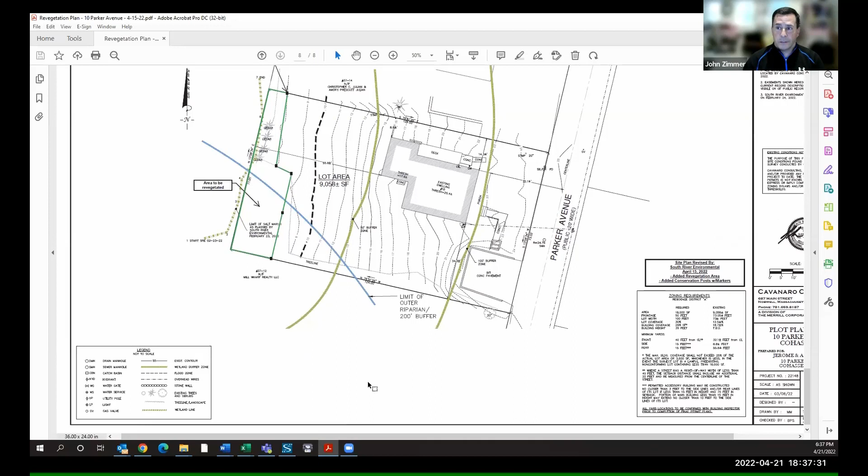Tell me, John, there's a lot of what I would call incursion, and I believe that's the 50-foot buffer line, the first green swath coming down. Yeah, right here it is, yes. To the left of that, all right. Is that currently lawn now? Yes, the majority of it is. You can see, if I zoom in a little bit, there's an existing tree line that they had shot. So that's the limit of basically the, quote unquote, natural vegetation. And then the rest of it's lawn basically down to it.

Tell me, will you be revegetating a portion of it with grass seed, or what will you be doing there, John? No, it's everything that's within this green box. The only seed that will be put down is a New England wildlife and conservation mix. Okay. So it's all native, wildlife friendly type species. So it's not lawn grass at all. Okay, that's good. And how is the ground prepared before you put that down, John? They'll typically just rake it out in the areas that it needs to. They don't do significant soil amendments. I don't think you'd need that out there to get the seed mix to grow.

And last hearing, we had seen that there were some stumps that were down in that area. Do you have those located on here? I do not know. So my question would be, do we have them on any plan? I'm just wondering what the relationship of those to the revegetated area is. I don't believe that those ones were survey located. There's a couple up by the house that are the more important ones that they'd like to remove. I don't want to speak for the Whitneys, but if they could leave the stumps in place that are in the revegetation area, then that would be preferable. Or maybe grind them to ground level, versus having to pull the whole thing out.

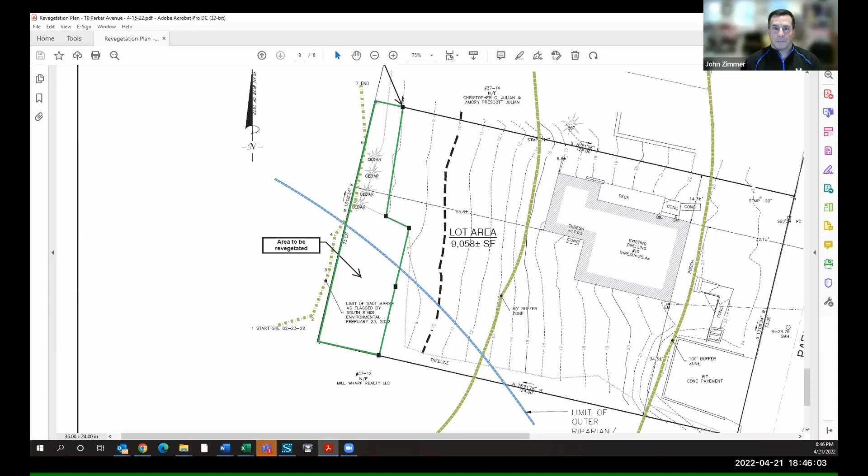Our next hearing this evening is at 92A Beach Street, and I need to read into the record the public notice. In accordance with Massachusetts General Laws, Chapter 131, Section 40, the Cohasset Wetland Bylaw, and the Cohasset Stormwater Bylaw, the Cohasset Conservation Commission will hold a public hearing on Thursday, April 21st, 2022, at 6:30 p.m. via remote participation on a Zoom platform from applicant Robert Bailey. This is for a request for determination of applicability 22-09 to remove 4 trees from a property at 92A Beach Street.

Bob Bailey was unable to make it tonight, but he said that his arborist, Andrew Spalt, would be able to call in. I don't see him in the audience, but there is a phone call-in listener. So I'm not sure if that's them, but if they can raise their hand, we can promote you. Sorry, I just raised my hand. Yeah, it's okay. I could see if they call in later. I don't know. I don't see him in the audience.

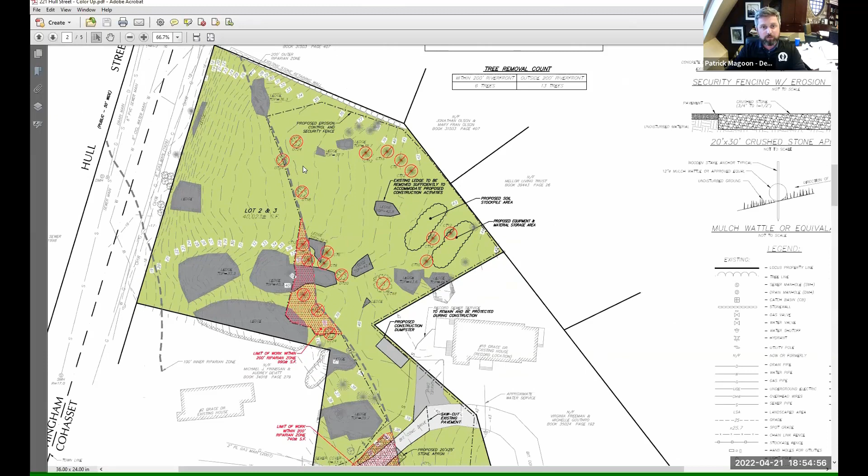As noted, I've got a tree removal count on this sheet within the 200-foot riverfront area of 6 trees. And those would be these, 1, 2, 3, 4, 5 right there, and this guy kind of on the edge over here, which on the landscaping sheet or the layout sheet, we've shown some proposed mitigation to offset what we're proposing to cut.

And here's the layout sheet, proposed landscaping at a 2-to-1 replacement, 6 trees removed. We're proposing 12 plantings along this driveway and walkway within the riverfront area to mitigate that. You'll see the proposed building here. It's approximately 3,425 square feet at this time. We don't have an architect at this moment, so that's not finalized. We will need to have one aboard to get a final number on that.

What we're looking to do is kind of lock down more of a limit of work moving forward, as we're still working with the building department in regards to that and our building footprint. And that won't really be finalized until we have an architect. So what we're looking for is to lock down a limit of work, and if that footprint changes once we get an architect, we'd obviously come back and amend that, but I'll work within that limit of work that had been approved.

But one thing you will see is access to the site is coming off of Grace Drive. And we did that for two reasons. One, obviously you can see the slope adjacent to Hull Street is pretty steep. The only real access you could do is coming in from this corner right here, maybe wrapping around, which would take some significant grading. It'd be a lot harder in multiple aspects. So we're proposing to come off of Grace Drive, easier grading, a little flatter, easier to work with.

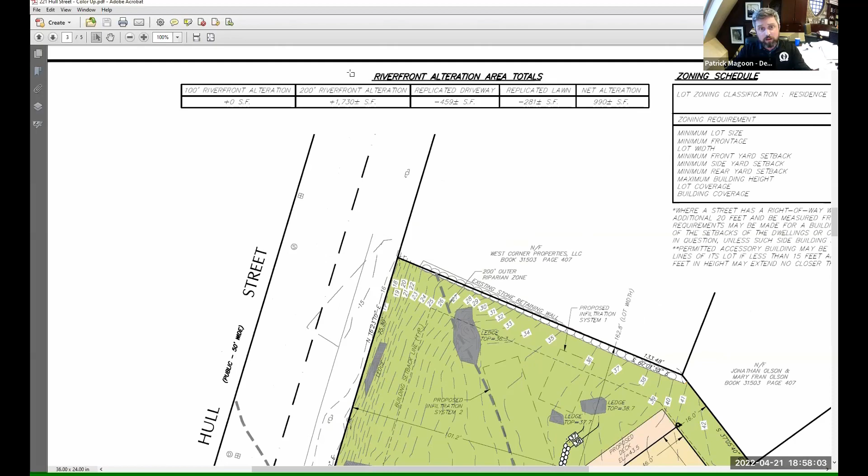So our total alteration area is 1,730 square feet. However, we have replicated the driveway area down here. That's approximately 459 square feet, as well as replicating some existing lawn, which is 281 square feet, bringing us down to 990 square feet, for which we filed a variance form that we submitted with the packages that we sent. So we hope that, getting below that 1,000 maximum alteration by the town standards, the wetland bylaw, section 40, I believe, replicating some of that area will help get this through.

So this is also a grading sheet. We had some accompanying grading. This is the high point of the driveway. So this water will shed this way and also this way to a catch basin over here. But largely the grading and drainage patterns on site are relatively the same. This area of the site is still sloping that way, water's still shedding that way, and the portion of the site over here is still shedding that way. We haven't really changed the drainage patterns much at all. Just tweaked it a little bit for whoever's living there to have a better experience.

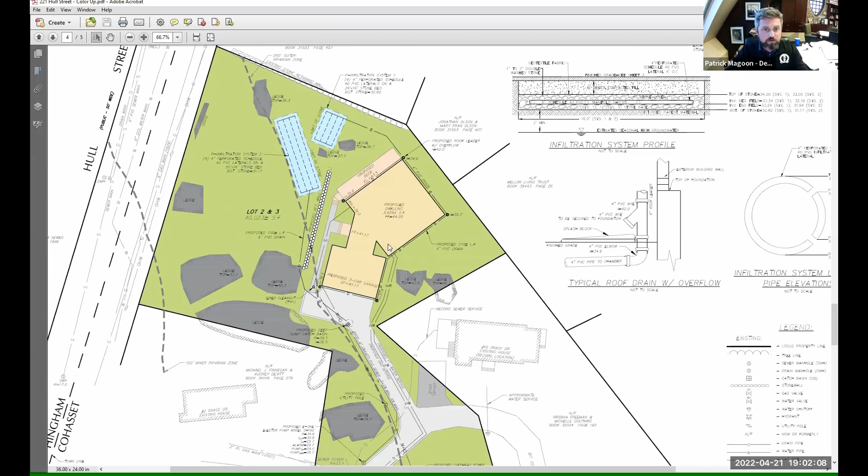But yes, why don't we go to that then before we go on? So this is just our utility. This doesn't show the grading, just to better show the utilities going on the site. So to get into drainage specifically, we have two systems. They're both perforated 4-inch PVC pipe with surrounding stone. I have details of the exact dimensions of each one on that same sheet.

System one is strictly for the roof runoff. So that captures all the flow from this 3,425 square foot building, and that gets directed down to system one, which is infiltrating, but due to, as I mentioned before, the low infiltration rate, a lot of it isn't infiltrating. We've done it to the greatest extent possible, but given the soil conditions, there's only so much that can be done. But we have reduced or matched peak rates of flow.

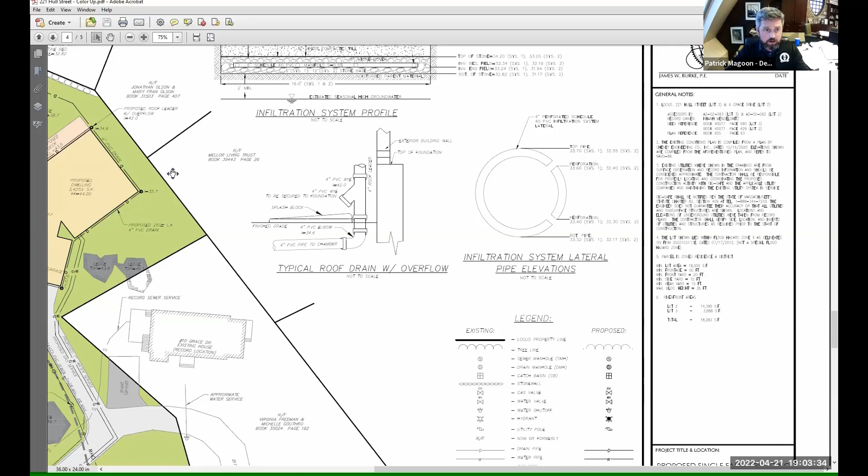Overflow control is provided by a roof leader here with an overflow outlet at 42. So during events where this backs up, it'll overflow out. It actually has a detail like this, and that will overflow down and then flow down to Hull Street.

Infiltration system 2 will capture, actually, if I go back to the grading sheet to show you better, this high point right here, the driveway is kind of the dividing line of the watershed. So it'll capture flows of the driveway coming this way, the whole driveway area, and a good portion of this backyard, which is sloped to eventually get to that catch basin. And that catch basin is directed to system 2. It functions the same way as system 1; when it backs up, it'll similarly flow down Hull Street.

So just while you're on that, it looks like the existing grades now have pretty much everything running right to left on the sheet, right? Correct. You're adding a swale or whatever you want to call it in the driveway, so the first or maybe the middle third of the driveway is going to be going left to right now. Am I reading that right? So you can see my mouse, right? Between the 40 and 39, yeah. Between this 40 and this 39? Yep. So everything on this side is gonna flow this way.

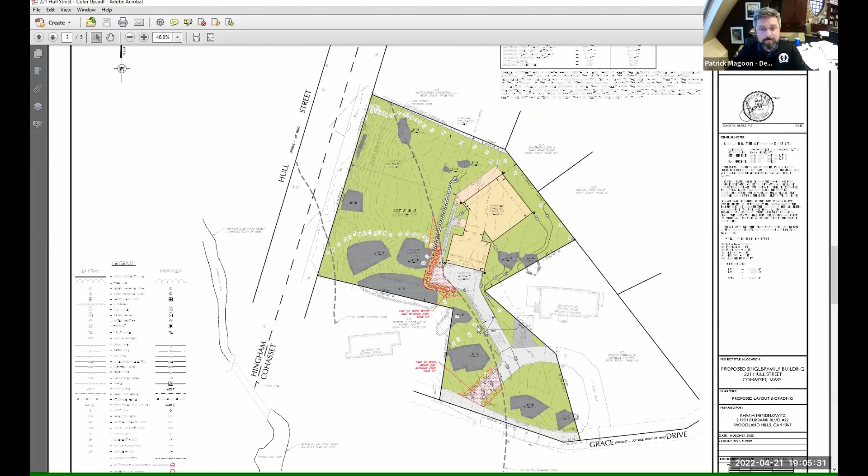But if I go back to the existing, it's flowing this way already. There's kind of a dividing line right here. So in our HydroCAD calcs, we've shown that peak rate of runoff has decreased going this way, as well as going to Hull Street. But you are understanding that correctly, if that answers your question. Back to the utility sheet.

In addition to the drainage, all services will be coming off of Grace Drive, pretty much within the driveway envelope to minimize disturbance area. We have a 1-inch type K water on the far right side of this driveway. Proposed gas service in here, that'll be per the utility's purview, how they deem best to do that. We have a sewer service, which keeps that 10-foot separation. The minimum is right here, 10 feet from sewer to the water.

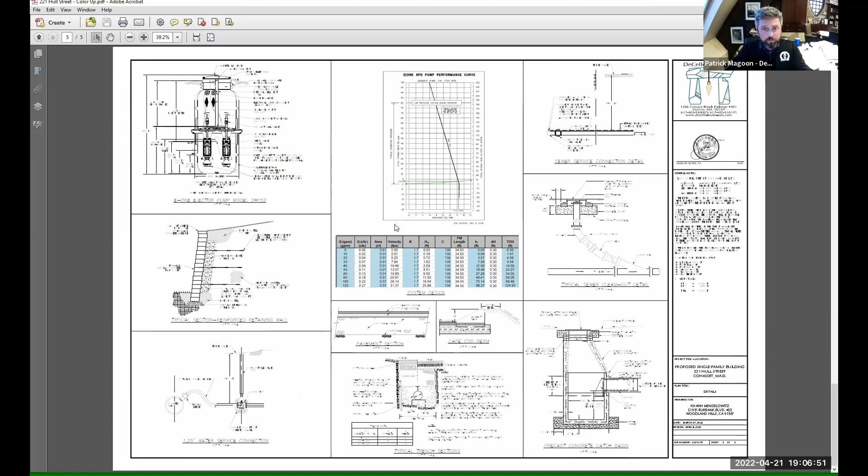So the sewer comes out by gravity down here to this E/One pump, and that E/One pump connects into this force main over here. And the proposed electric and communication services are proposed to come off of Grace Drive via this utility pole, with a proposed utility pole about midway, out of the riverfront area, and then tying into the building where it's best fit. And this is just our general detail sheet. That's really all I had for you guys. I'll be happy to answer any questions from the commission or the public.

Can you go back to the grading plan and zoom into the house and parking court maybe? Yep. Like maybe here. That's fine. So the existing grade is between 42 and 30 something for the home. Do you know how much fill's going to be brought into this site? I don't have it for the whole site at this time. For the riverfront area, it's approximately 1,300 cubic feet. Okay.

And have you done any test pits out here, or you're just basing it off of the soil classification? No, we have not at this time. Yeah, strictly off the soil SCS. Okay. We typically like you to do a test pit just so that you actually know what kind of perc you're going to get. I mean, obviously you're counting on not a very good perc, but it could be even worse. So okay, it's noted. Important to us. Yep.

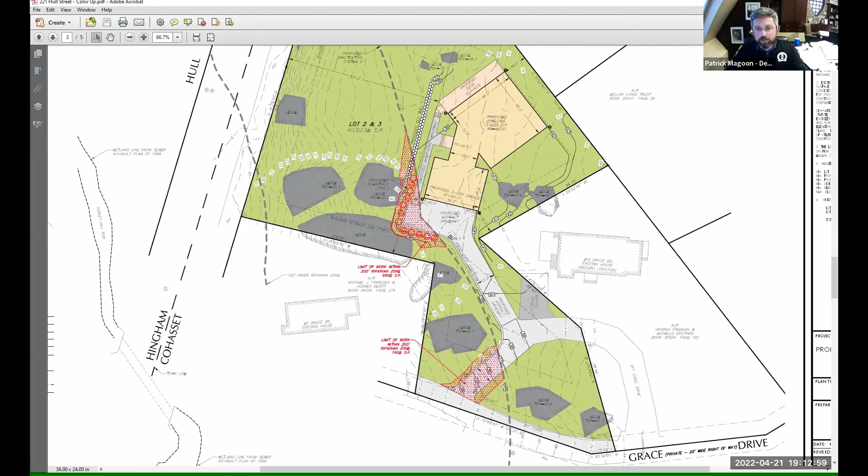How far are you from the riverfront there? 200 feet or so? I'm sorry, I missed that last part. Yeah, so this dashed line right here is the 200 foot across the site. And you'll see this is the 100 foot that barely crosses the site over there, which we're not proposing to touch at all.

Patrick, I see a lot of green on the site. Yes. That tells me you've got lawn there or something. How deep is the soil there until you run into granite? I presume, since we have the granite outcroppings, where we don't see the outcropping there still is granite, just not on the surface. Yeah, so it's not really known until you start digging. I just did that more for presentation purposes to make the ledge stand out.

But yeah, given the amount that's above grade or at grade, you could assume there's quite a bit right beneath the surface in those green areas. Yeah, I mean, I see the green, and I think that you're telling me, Eric, don't worry, this area is going to percolate a lot because we don't see any ledge there. But suppose the ledge is 6 inches below surface, you're not going to percolate at all. It's all going to go rushing down onto Hull Street.

I understand. It wasn't my intent to throw you off with the perc rate. It was more from a presentation standpoint to bring out the impervious areas, that being the pavement and the ledge, and showing that the other stuff is either vegetated of some sort, at grade, knowing that right below grade there could be, most likely would be, ledge.

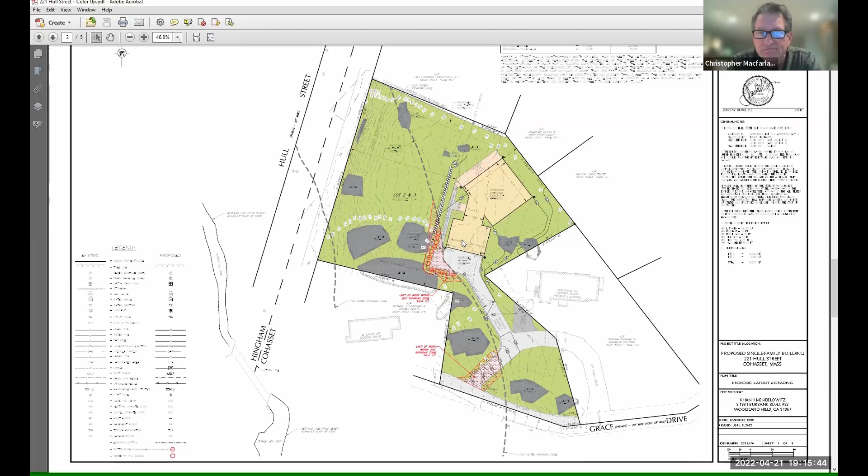In the meantime, I can pull up photos. Do you guys want me to pull up any photos from the site? Yes, please. Is it okay if you stop sharing, Pat, so I can pull up my screen? Yep, no problem. Thank you. I took a lot, so please bear with me. I'll go through these quickly.

So this is looking at the site from the bottom level on Hull Street. This is walking around Hull Street, the existing conditions. Sorry, my computer's going a little slow. So you're standing in the restaurant parking lot looking up at this site? Yeah, this is walking along Hull Street so you can see the existing conditions. No work is being proposed in this area, but I wanted to give you the full perspective. Sorry, my system is going pretty slowly.

Charlotte, the proposed work is what distance above what we're looking at there? So the proposed work is outside of the 100-foot riverfront area, and then a portion of it is crossing into the 200. So this is just the view from Hull Street. And then this is going upward into the property where you can see all the existing ledge. And this is the site as it is right now.

As you can see, it was previously disturbed. There are some dirt stockpiles, and it looks like they may have tried to survey for the foundation; they tried to dig a trench to maybe look at drainage. And these are some of the existing trees that are marked to be removed. This is walking around the site. These are the trees proposed to be removed in the 200-foot riverfront.

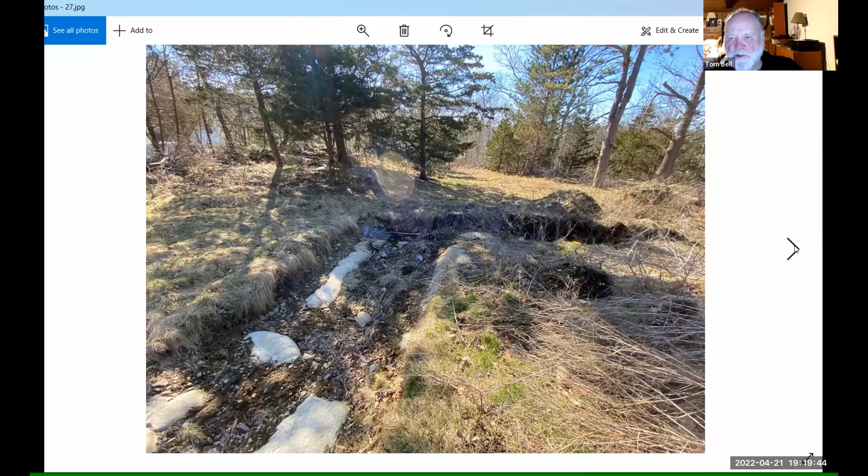the applicant has failed to note that they're within 500 feet of an area of critical environmental concern. In fact, they checked the box that said there was no area of critical environmental concern, but they're only 500 feet away from one. So that's something we need to keep in mind. And in fact, Turkey Hill Run drains into that. So any water that ends up on Hull Street or Grace Drive is going to end up in Turkey Hill Run and immediately into the ACEC.

So we need to really be cautious about the stormwater conditions here, how they're treated, so that we don't get sediment going into Turkey Hill Run, which then goes into the ACEC. That's not a good thing. The other one, I believe both Eric and Chris pointed out, was there isn't much soil here, and there really isn't. All this outcrop is speaking to how thin some of the soil is, and what soil there is is probably till. And it's obviously pretty compacted because it's not draining. So that's an issue as well.

One of the things that would concern me if I was an abutter here, particularly if I owned that parking lot, is there's going to be 2 large infiltration chambers that are going to drain right into this granite in a much smaller area than is happening naturally. So it's going to focus all that runoff in two areas, and water is going to find fractures in that granite, and a lot of it's going to end up in the parking lot.

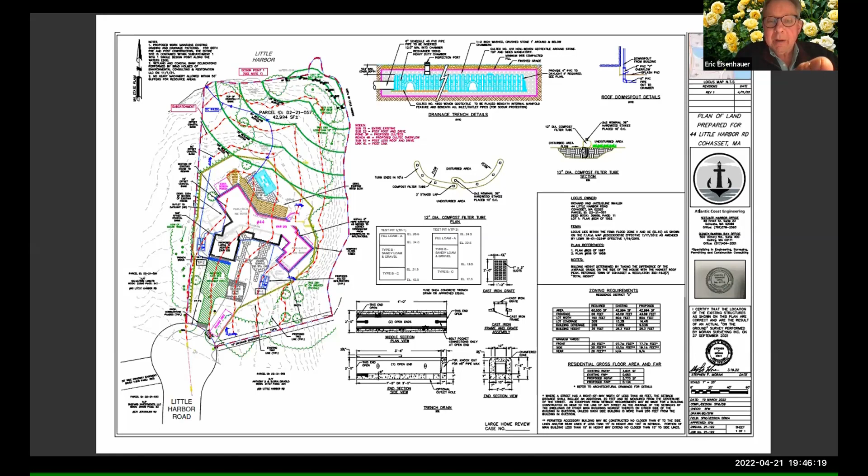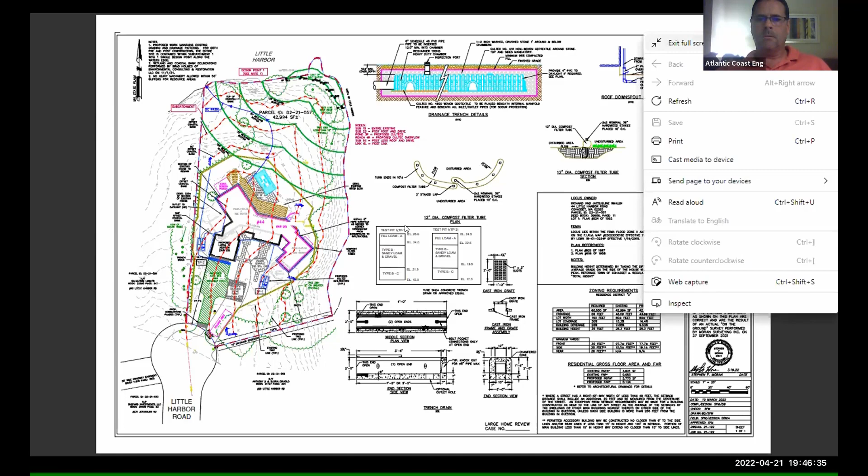Excuse me, could you expand the diagram so that the drawing itself and not all the footnotes fill the screen? Because as it is right now, I can't read anything. What we want to see is the drawing on the left. Yeah, just the plan for now, and move the other stuff off. He's working on it, just bear with me. How is that? Is that better? Getting better, yeah. I guess we'll have to move it, otherwise we're excluding part of the plan itself. Okay, that's good. Thank you.

Okay, so the first item we addressed, which you folks had a concern about, was the location of the Cultec on the right-hand side. We previously had it over on the right-hand side of the existing house. It's probably too close to the top of the coastal bank, so we moved it more towards the front right of the house, well set back from the top of the coastal bank. As you can see here where my cursor is, between the proposed paver terrace and the front right of the house. Can everybody see that? Yep. Okay.

And then the other Cultec more or less remained in the same place. You also wanted us to provide the test pit information and location, so that's been added to the plan, and you can see over here on the right the test pit information along with the soil types and the elevations associated with the locations of the test pits.

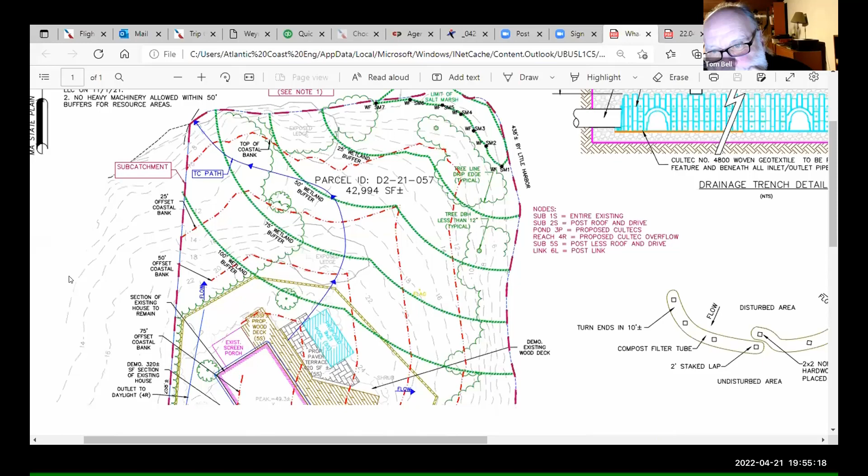I think what Tom is getting at is that the Cultec system collects water from a particular area of the site. Sure. Right. The Cultec chamber is your design point, is that correct? I'm sorry, I can't hear anything right now. The Cultec chamber is your design point. Is that correct? Yes. And so it's drawing water from some place, which is the subcatchment itself, right? Yes, from the roof, in this case on the left-hand side. You have a subcatchment, a route, and a design point where you do something with the water.

Okay. So that's sort of what we're looking for. Where is the water coming from? Where is it going? How's it going to get there? Right, and it's coming from, in this case, the roof. We can show you on the architectural drawings, at each corner of the roof, there's downspouts that will come down. You can see one in the back left here. And again, I apologize for these yellow labels. I don't know why those keep popping up.

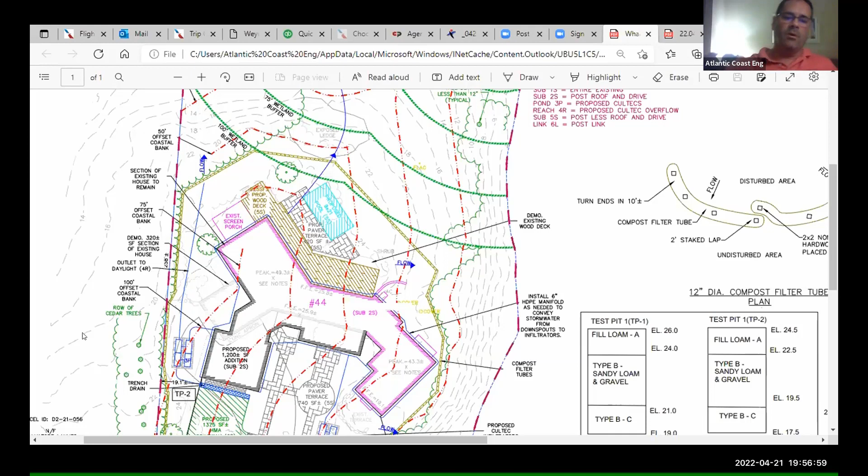But my point is, at each corner of the house, there's a gutter tray and a downspout that comes down into the Cultec. You can see the blue line there. So that's the flow. Goes from there to the Cultec, and then relative to this property line, it generally goes down perpendicular to the contour lines in the rear of the property. Okay. But it's also collecting water from the trench drain next to the driveway, correct? Correct, 100% correct. And so what is the limit of water going into that trench drain? The limit of water for that is essentially the area around the driveway.

Well, that's the point, is what's essential and what's actual. You can see the area shown in the stormwater report. No, we can't see it, because you don't know where the ridge is. There's a ridge that divides the property into zones, and each zone flows to a certain catchment. That's the whole idea here. Yes, I'm well aware of that. This drawing should have been done with just the subcatchments on it and the building footprint, so that we can clearly see what's happening here. This is a very busy drawing.

Right, understood. But we also need to show what's proposed on the site plan, right? That's what's required. And so there's driveway changes. What's required is that we be able to understand what you're talking about. And anything you can do to make our job easier makes your job easier. When you load your drawings up with all this stuff, and then we try to talk about one element after another on the same plan, it's very hard to follow. Sometimes when you make a drawing, you think it's obvious, but that's because you're making it. You need to look at it from the user's point of view. And this is a busy drawing.

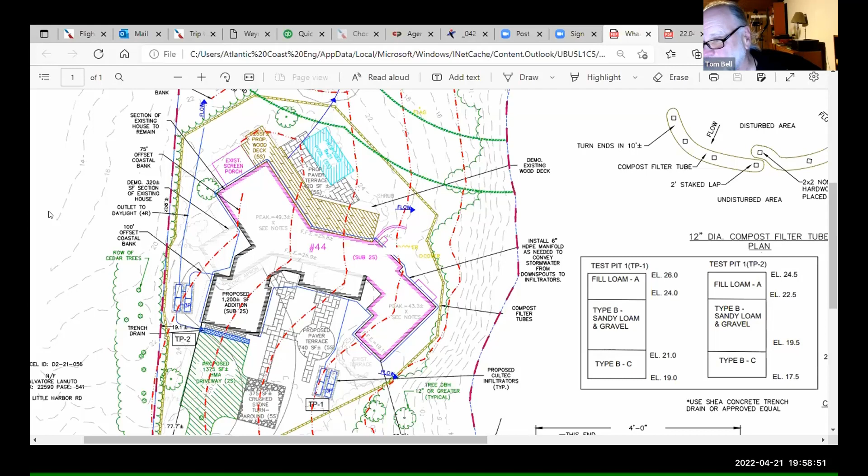I agree 100%. It's a busy site. There's a lot here, both existing and proposed. I tried to best capture that. I would think that you would have a drawing for each one of the elements that we're going to talk about. I'm sorry, can you say that again? I would hope that you would have a simple drawing for each one of the design elements we're talking about, whether they be the structures you're going to be putting in, or the drainage, or whatever it is. Why do we have plants shown on this? We're talking about your stormwater management plan, but here we're looking at trees here and there.

Yeah, some of the trees are shown. Commissioner Bell, this is Sean Papich. Those are the existing vegetation. That is part of the existing conditions piece that Atlantic Coast had left on the plan, which I think makes sense. To your point, it seems the drainage and the subcatchments maybe on their own plan is easier to read, but most of the other hardscape elements, in my opinion, need to be shown on here so you understand what we're proposing.

But I think you're right, the drainage aspect of it is probably challenging to pick up, especially the description of the subcatchment areas. I can see that from this. Sean, we have a great deal of concern on all these projects about new work that's going to take place within the 50-foot buffer zone. Correct. I'm trying to figure out, looking at this, what's going on, and I can't. I would like to see a chart with the build and the buffer zones, and only that. This is a very complicated buffer zone situation naturally, and I don't think I can do that here.

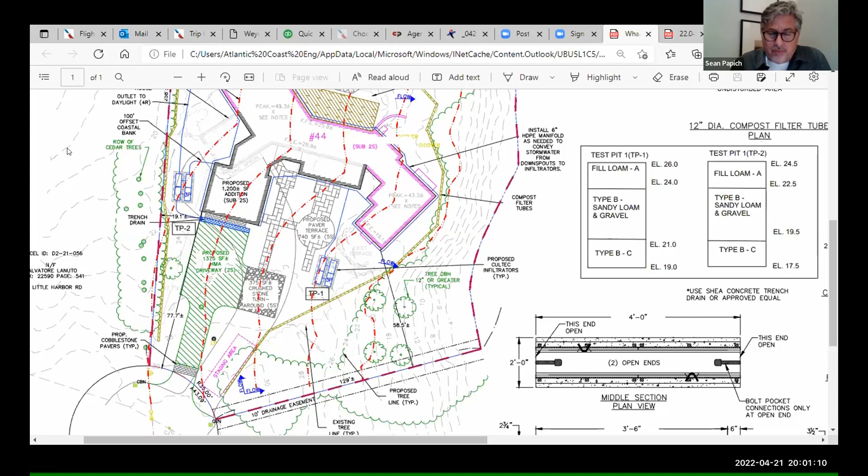We looked at it last time during the first hearing. There was discussion of that when we pulled up the site plan and description of existing conditions versus proposed. On the first hearing, that was a major part of the discussion. That was the presentation of the plan. I'm sorry for cutting you off, Tom. Oh, it's okay. I'm just looking at this thing and trying to make sense of it.

I do understand Tom's point, and it's not easy. I do understand your point about the drainage piece and the subcatchments. Generally, we're used to seeing a set of civil drawings that goes material plan, layout plan, drainage plan, utility plan, you know what I mean? Where you can pick out specific plans, 4 or 5 sheets that are the same layout but show different elements of what's going on the site, instead of all in one.

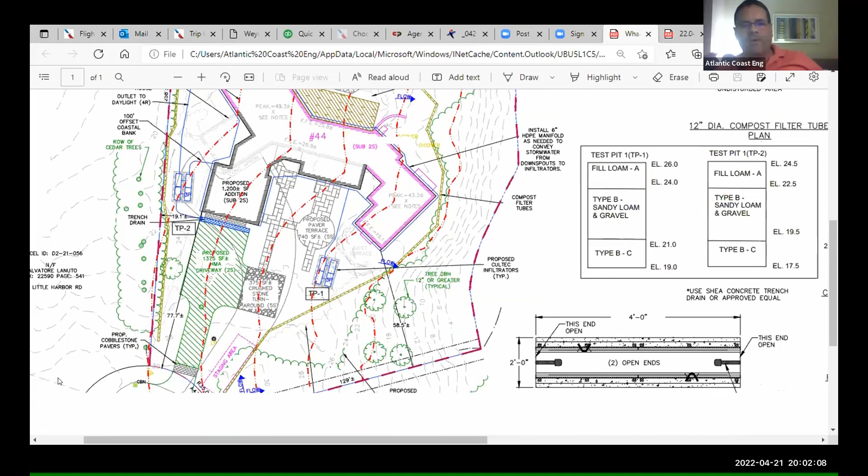Okay, so if I could just talk about that briefly. There are no plan changes in terms of utilities. It's a pre-existing house. There's a renovation on the inside of the house, walls in. There's no planned utility changes on the exterior. There's obviously site civil work for the Cultecs planned, and the associated addition with the garage, as well as the landscape architectural work. This is a Cat 1 stormwater submittal, given that it's an existing house with a proposed addition.

We did our best to depict the proposed layout with the Cultec systems, and I feel as though we addressed all your questions and concerns that you had last time. If you need some other edits done, we'd be happy to try to do that. But this is what the proposed site plan looks like. I'd be happy to pull up the existing conditions plan if you want to see that.

No, it sounds to me, which we can't tell from this plan, like you haven't defined the subcatchments correctly. If the driveway and the roof go into the same Cultec, they should be in the same subcatchment, and it's not shown that way on this plan. Well, it is shown on the plan, right? I don't see a line that says that 2S continues into the driveway. So the driveway pitches towards the trench drain, and you can see on the left side of the trench drain there's a pipe that goes from the trench drain to the Cultec.

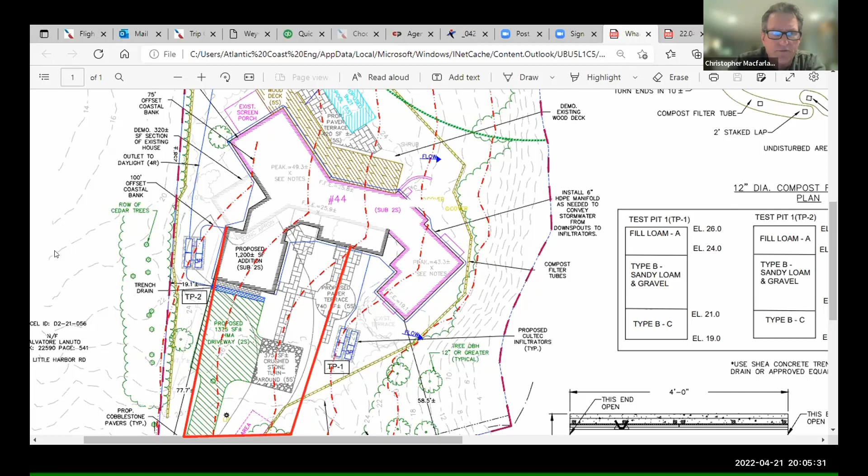But is it just a pipe right off? Is it like a standpipe on top of the Cultec, or is there an outlet somewhere? I can show you in the detail. There's an outlet. Let me zoom in on it. There's a 6-inch Schedule 40 PVC outlet. And what's the elevation of that? Does it have it there?

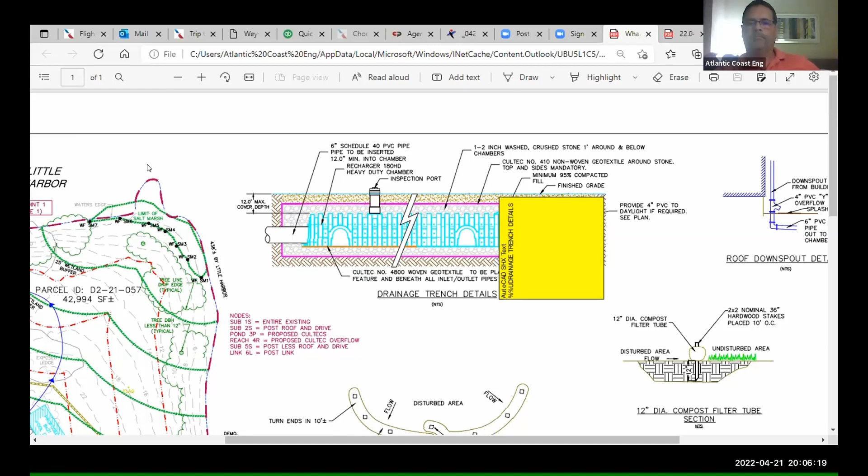The elevation is 5 feet below existing grade. 5 feet below existing grade. Yes, to get below the frost level. So you're gonna have a trench basically heading towards the bank, right? And daylighting somewhere down there. So it'll exit the Cultec, and then some of it will percolate into the existing soils, and then the overflow will head towards the top of the coastal bank. Yes.

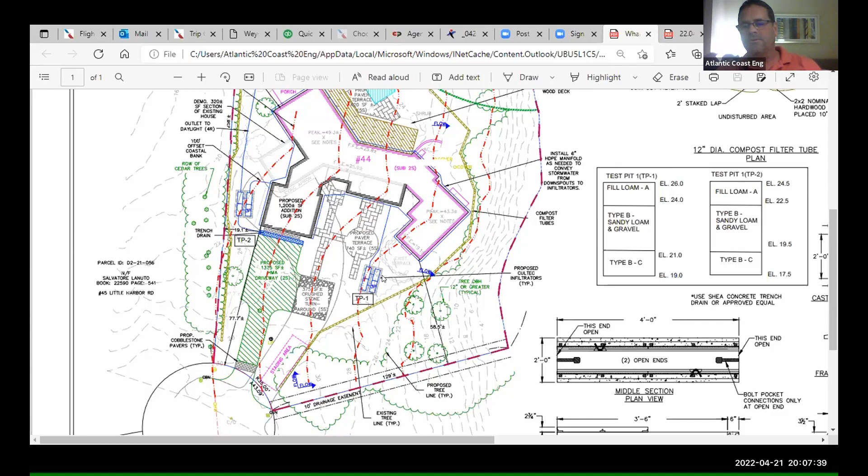But if it's 5 feet down, it's got to daylight like out here somewhere. Yes, that's correct. And kind of the same question for the other one as well: is the blue line an underground pipe, or is that just where the water is flowing? Where does the actual overflow pipe come out for both of those? I mean, everything's perking into the soils. We didn't design the pipe to go all the way over to the coastal bank. I think that would create unnecessary erosion along the coastal bank. So we have it just coming out of the side of the Cultec, and then in theory it percolates from there.

Oh, I see. Outlet to daylight is not necessarily an overflow if it's filled up. That just means that's what's perking through the soil. Exactly. When you say outlet to daylight on the left. But these systems do have an overflow, right? I would think, yeah. Otherwise, everything would overflow back at your gutters. Right. But it wouldn't be at the bottom.

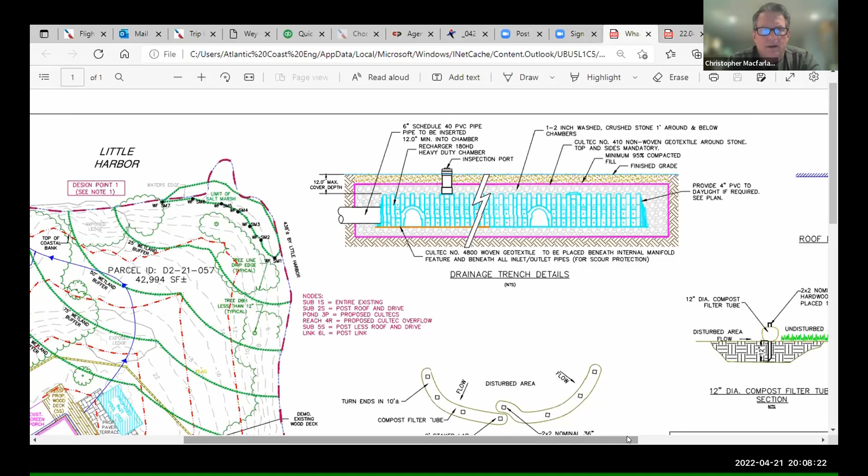So how much clearance do you have from the bottom of the Cultec to, first of all, bedrock? And if you don't know that, then to the water table. So our test pits, one of them was 7 feet and the other was about 7.5 feet. We encountered groundwater right at the bottom, approximately 7.5 feet.

Normally, people that come before us would describe the soil and estimate where the seasonal average water table was based on modeling. Not the best measure, but that's normally what we see. There could also be references to any weeping in the sides of the pits, not just standing water, but weeping, stuff like that. Would it be helpful to share the photos of the test pits? I'm happy to share my screen. Yeah, let's take a look at them.

Okay. Sorry, Jed, can you stop sharing for 1 second? Sure. Thank you. Sorry, lots of things open. Give me 1 second. There we go.

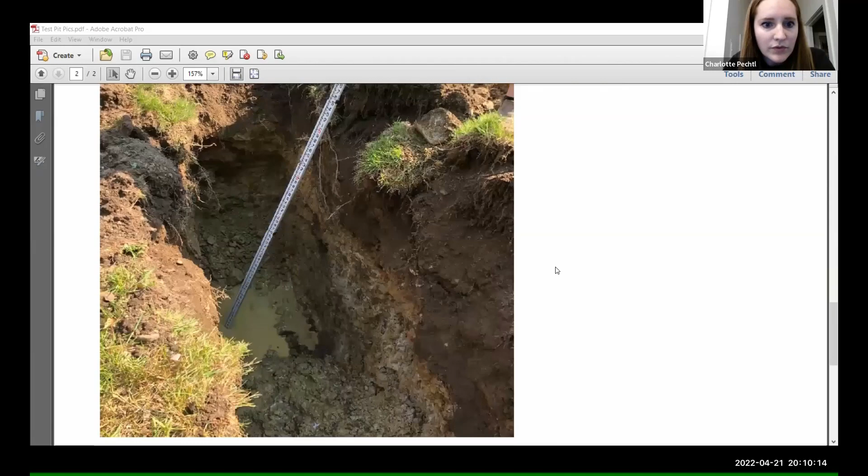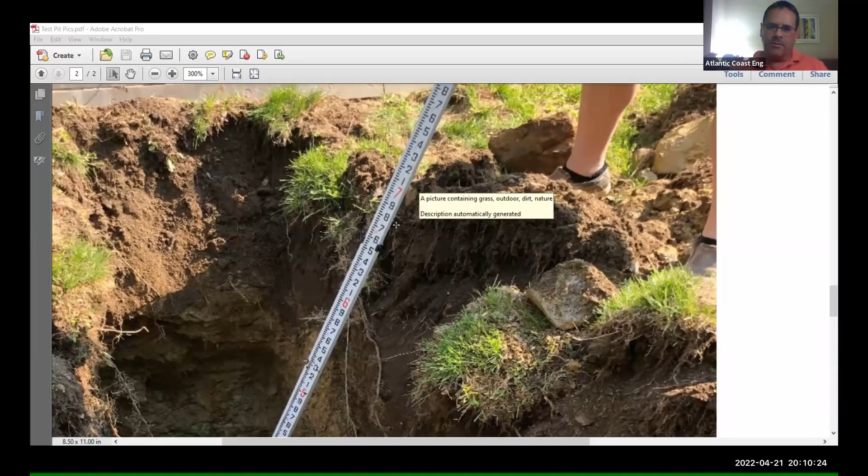So these are the test pit photos that were taken from the rear right side of the house. I'll stay on this one for a bit, but there's more. Front right side. And then this is the front left. And if you zoom in on the rod, that was a survey rod. It's approximately 7.5 feet. There's a pretty healthy layer of loam there. I stand corrected, it's approximately 7 feet. Sorry about that. About 5.5 to 6 feet maybe, standing up. Yeah, it's at an angle, so it's not 7 feet. And it's in the water, yeah.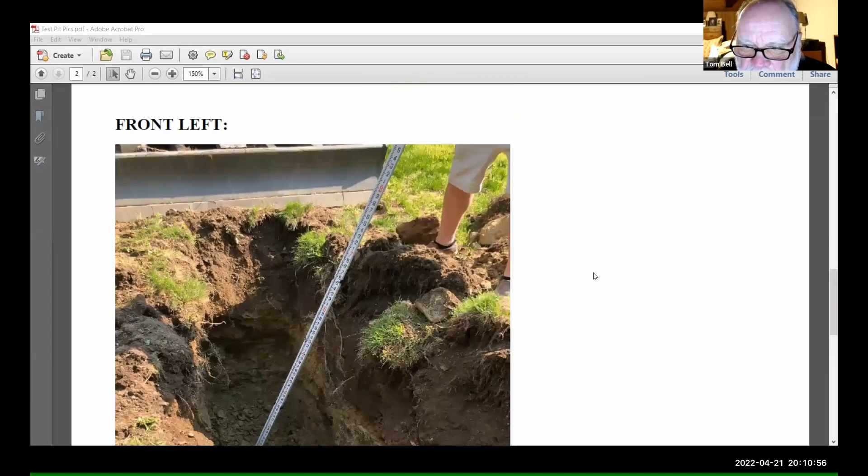So it looks like you have a zone of iron hydroxide right at the base of the loam, which is probably marking your seasonal high water table. And that looks like it might only be 2 or 3 feet down. Ordinarily, that would be in the soil description. Do you have the soil description you can show us? That's a pretty obvious feature. A lot of soil profiles have a really hard time seeing these various zones, but this one is clear as day. You've got bleaching, you've got iron oxides along the top surface of it, where iron minerals are being oxidized. Clearly, that's the high water mark.

You know, all I can say is what we observed when we were out there. I don't know if that's the high water mark or not. That's where the existing groundwater table is located as of last week. Well, that's not what we're looking for. We're not looking for an instantaneous measure of where the groundwater is. What we want to know is what the average, what the high water mark is, essentially.

I mean, because your Cultec chamber is not going to be out there for one day, a day when the water table is low; it's going to be out there for years. And so it needs to work under high and low water conditions. Understood. I assume you're a licensed soil investigator. Is that right? I'm a licensed civil engineer, and I have a licensed soil evaluator that works with me. And did your licensed soil evaluator log this hole?

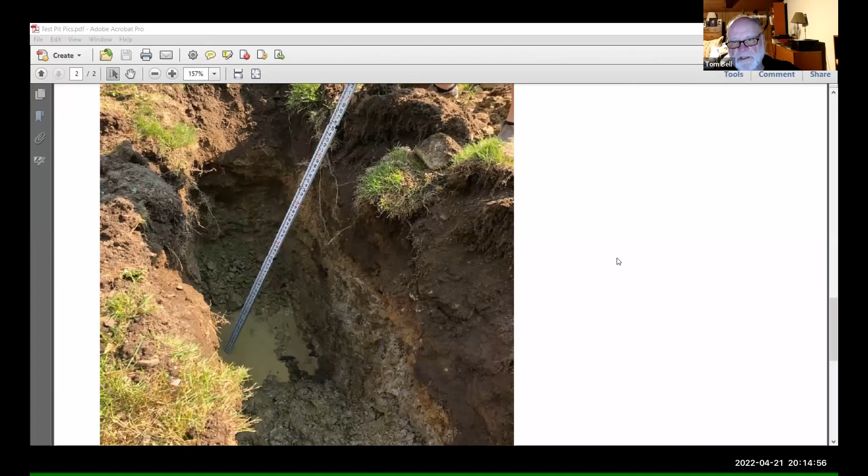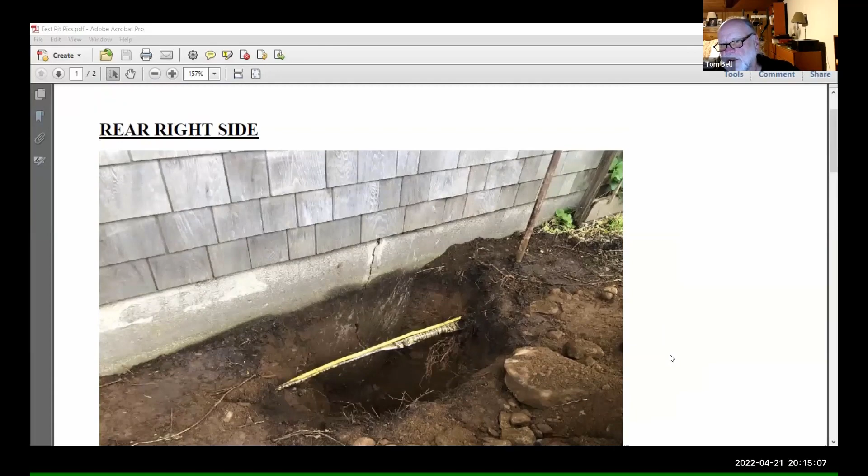I think somebody else should look at this. At least the photos. Another soil evaluator. At the very least, those photos should be, I mean, it's pretty clear to me. I think, just to tag on to that, part of the problem is our bylaw says that the seasonal high groundwater elevation should be on the plans and as evaluated by a licensed soil evaluator. So whoever that was should at least have put their name on the plans and marked it on your test pits where that water was. Sure, that's not a problem. We can do that.

Again, this is a Category 1 stormwater administrative approval with obviously conservation oversight, and it's our professional opinion that we're well in compliance with both DEP and the Cohasset stormwater bylaw. We could certainly add that information that you just requested. In the last meeting, it was requested that we show pictures of the test pits and the soil profiles. So we did that.

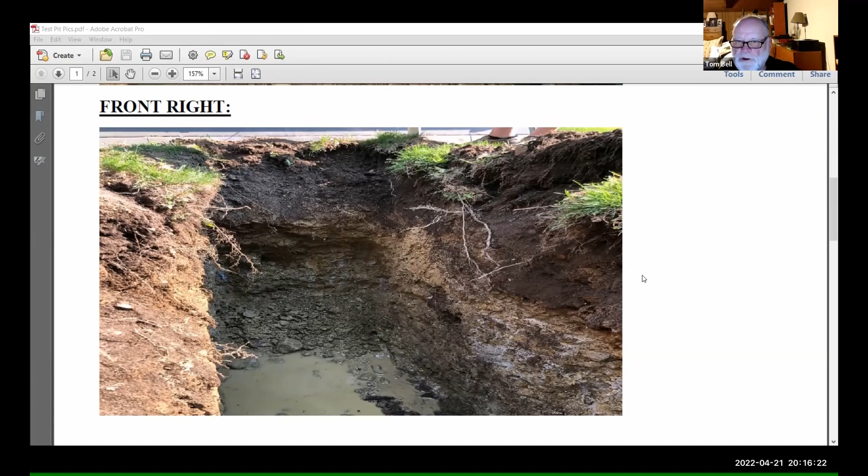Well, obviously the intent was to find out where the water table was. Why else would you put the soil pit there? This wasn't just an exercise to put somebody to work with a shovel or an excavator. The whole point was to collect some data that was meaningful. Right, and that's why we put a survey rod in the hole when we did the test pit. But we can certainly add that information. So how does measuring how deep you dug inform us in any way how well your Cultec chamber is going to work?

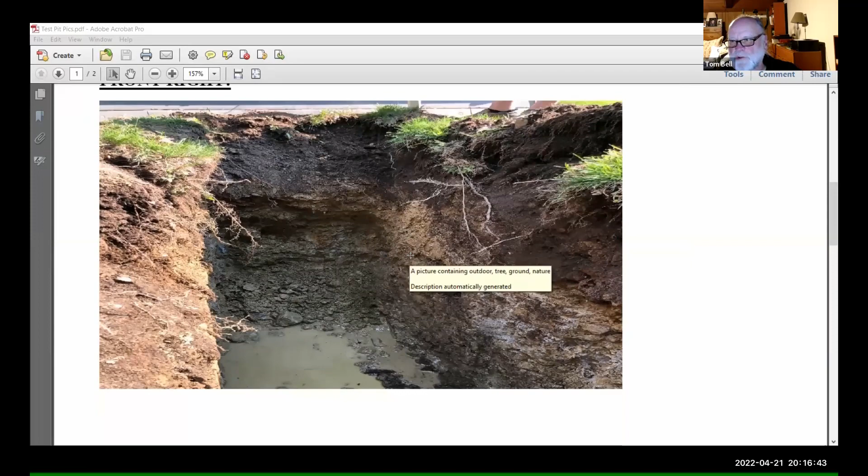Because we field verified with test pits the soil types to confirm that our stormwater analysis and HydroCAD input of the soil characteristics are accurate. So there's no better way to do it than field verifying, which is what we did. Well, there's a better way of doing it. I mean, obviously a perc test would be far more definitive than this, but we didn't ask for a perc test. What we expected was a soil profile that informed us where that water table is. And a one-time pit is not definitive.

You want to put in a piezometer out there and watch it for a year, we can ask for that and really get the number. But in fact, we generally accept a professional soil evaluator's opinion, which you are not, as you said, of where they think the seasonal water table is. And usually it's based on mottling in the soil and various other characteristics as well. It's not just mottling, that's not the only criteria.

But you can see that there's clearly three very well-defined zones here: a reduced zone that's gray, that's always wet, maybe not fully saturated all the time, but it's wet. And then a top oxide zone where that oxygenated water is oxidizing reduced minerals. Clearly that's the top of the water table, right? And that's between that gray reduced zone and the top of that oxidized zone.

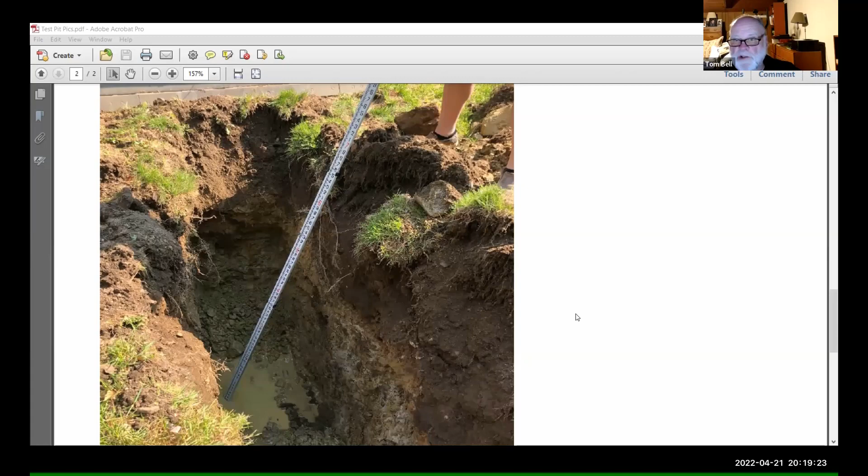Are these pits still open? No, they're not. Well, normally that soil evaluator should be looking at the real thing instead of pictures. He has no way of measuring anything here. Here you've got a survey rod at an angle. Well, he was out here during the test pits. So he's got measurements for how thick each one of those zones is, and yes. And he's going to sign and seal that. Is that right? Yes.

Okay. Pull up the site plan. Again, I think the soil data, at least the rough data, was on the site plan. Maybe we can compare notes. Yeah, let's have a look. As you can see, the two test pits, there's a fair amount of loam, approximately 2 feet thick up top. And then as we go down vertically, it's a combination of sandy loam and gravel for both test pits. And then as you go down further, it's a combination of BC type soils.

And then I can certainly add in the groundwater elevation down at the bottom. I thought it was intuitive if we put up the pictures, but that's no problem. I can add that. We can add that in along with my soil evaluator's information, and I can have him do a memo. Any other questions or concerns?

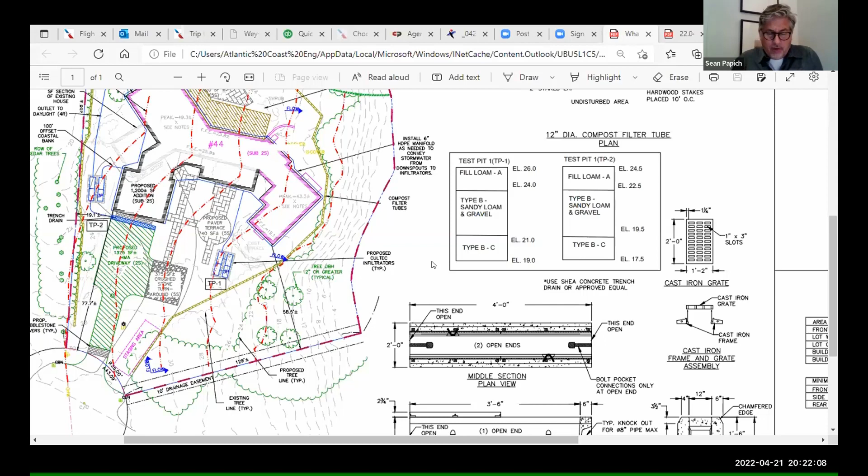Sean, did you have any changes since last week? Sean, sorry, you're muted. I'm muted. Thank you. Sorry about that. Yes, it was mostly graphic changes that you had asked for, Chris. There was getting the Cultec chambers onto the plan. And I don't know, Charlotte, do you have that? And I think Justin had asked for a color rendering or some sort of color graphic. So we have that also.

I can also share your plan, Sean, if you want the black and white and the color. Thank you. Sure, if you'd like to do that, that's fine. I could do it too, but I think we have a lot of people sharing right now. Okay. That's the black and white.

If you want to go to the color too, you could, but a couple of things, Chris, that we had talked about last time was to try to get that buffer on there a little more clearly, which it's on there a little more clearly. It does get a little washed out where you see the 50-foot coming through. We could also show the other pieces, the 2 Cultec chambers that we illustrated on the plan. The other thing I think you were concerned about was some of the existing vegetation line weights. It got a little bit muddy, and if you have to zoom in on any of this stuff, you can.

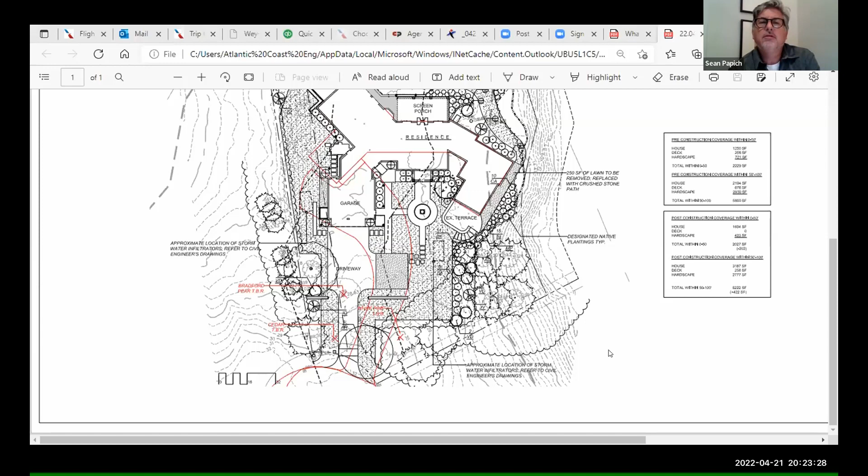If you go to the color rendering too, it's the same plan. It's just basically color rendered. If you've got it right there, Jed. It's a JPEG. Charlotte has it too, I believe. Yes, I can pull that up. Oh, there it is. Might be a little bit easier to see the separation of the different pieces. And if we wanted to zoom up or scroll it a little bit down, you could. Really, most of the same things apply. In terms of the plantings, that hasn't changed at all.

We're still planning for about 2,000 square feet of new plantings, both at the coastal bank and into the 50-foot buffer. And what we had found out essentially with the adjustments to square footage of impervious, we're actually reducing impervious surfaces in the 50 by a couple hundred square feet, about 202. We're increasing the square footage of impervious in the 50 to 100 by 400, but the overall project would mean a couple hundred square feet more in total. That pool is really a plunge pool.

It's a 9 by 21. It's kind of almost like a double spa. It's a small plunge pool, to give you some feel for scale there. That sits outside the 50. The only work that was being done, and I don't want to go over the entire project again if it's not necessary, but the intent is anything you see there that's got labels on it is all native plant material, all up against that backside of the house, all along the coastal bank. There are some funny pockets of lawn that get into that coastal bank.

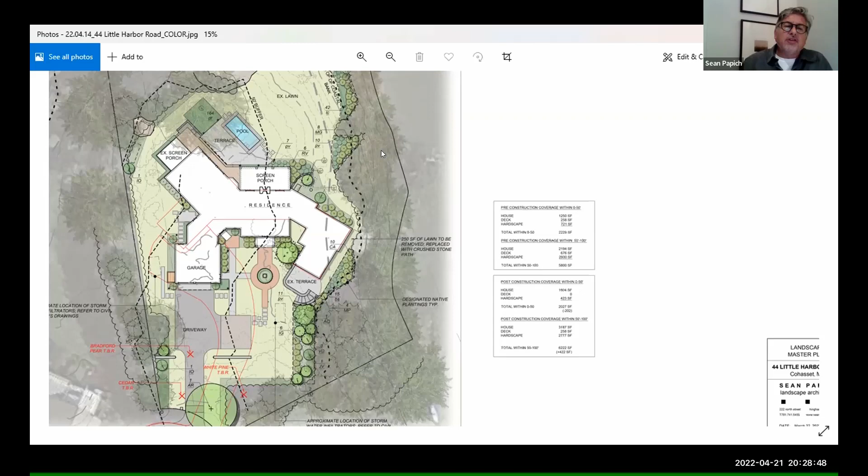There's some lawn area to the right of the house at the edge of the coastal bank, and we're removing that. The side of the house on the right, where at one point there was a Cultec chamber, that's all lawn, and we're removing all of that lawn. We're leaving a pathway of crushed stone there, but then we're placing a large massing of clethra. And what else do we have? We've got a handful of other plants in there: some seaside goldenrod, some other native shrubs.

So that's an area of lawn in the 50 that we're removing. Pretty good chunk of it right there, all on the side of the house. Doesn't make sense to have it there anyway. And what's directly north of that, where the leader from your 250 square feet of lawn to be removed goes right across something? Is that a ledge outcrop? If you can zoom in there on the photo, that would be great.

It's not a ledge outcrop. It just could be graphically. It's some pretty rough vegetation along the edge here. There is a line of vegetation there. I just mean this little, if you stop moving for a second. Sure. I just mean this spot right here. Yeah, that's just existing vegetation that remains. I'm not sure why it's so light there. Might be a little bit more lawn in there right now, but we would have it vegetated if that's what it is. Okay. I think it just might be the coloration of the aerial photo that we underlaid or overlaid. Okay. Yep.

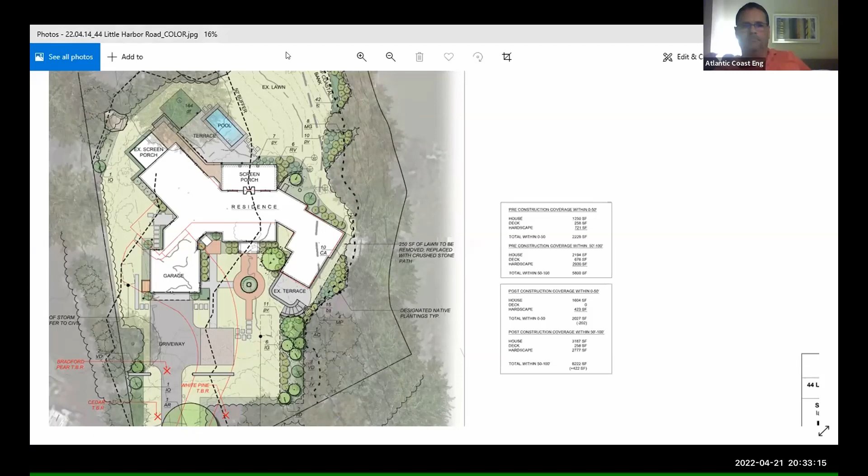All right, we are now continued to May the 5th. Thank you very much. Thank you. Our next hearing this evening is for a stormwater permit 22-09 for Lot 5 on Forest Avenue. This also was continued from April the 7th, 2022.

All right, promoting and moving people now. Yes, unpromote first. Yeah, they move around sometimes when they log off by themselves, and then sometimes I might accidentally kick a commissioner off if my mouse slips, so that's why I try to wait till it stabilizes. Let's see. There we go. Can you hear me? Hi, Caroline. Yes, we can hear you. Okay, should begin. Good evening.

For the record, my name is Caroline Rees, PE at Cavanaro Consulting in Norwell, Massachusetts. I am here representing the owner and applicant, Blake and Christine Martini, who are proposing to develop a lot known as Lot 5 Forest Ave as a single-family residential home. The stormwater analysis and permit application was presented at the April 7th meeting and was continued into tonight pending some questions. If you'd like, I could go through them briefly. I know I sent Charlotte a summary. I don't know if you received it, but I could roughly go through them or move ahead. I'll try to keep it brief.

Would you like me to share the screen? Yes, please. Sure. Okay. Thank you. I think we got it. So I tried to zoom in. Can you see that okay? Not yet. It hasn't come up yet. It says started sharing, but you haven't finished sharing. Oh goodness. I don't know what I'm doing. Try again. Unshare and share again. I can't even find that button and all the screens are blacked out. I am not sure what has happened to my screen. Yeah, I'm trying to resume share. Can you see that now? There we go. Yes. Okay. I can't see them anymore.

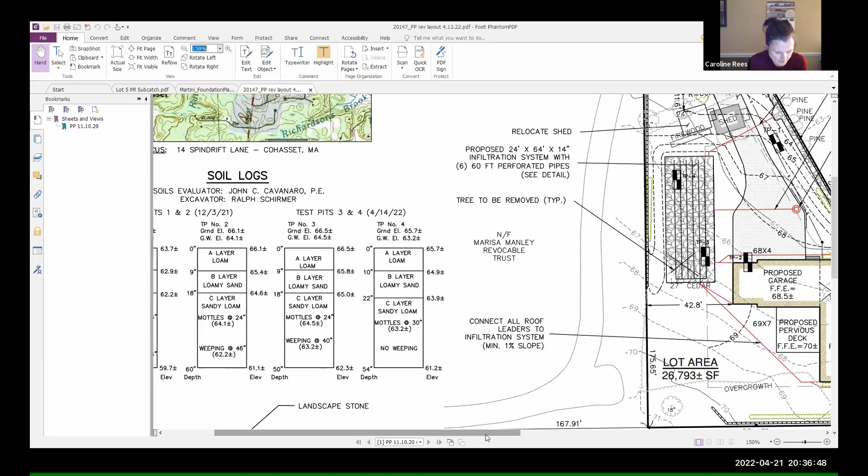The second thing was to model the gravel driveway, and I'll pull up the subcatchment area. This was helpful. Before, I did not model the gravel driveway separately, and I apologize for that. I did go back and model that with a higher CN number than the lawn. I used an average of what a compacted road would be versus the lawn originally modeled. It is modeled as a more impervious surface; the higher the CN number in HydroCAD, the more impervious a surface is.

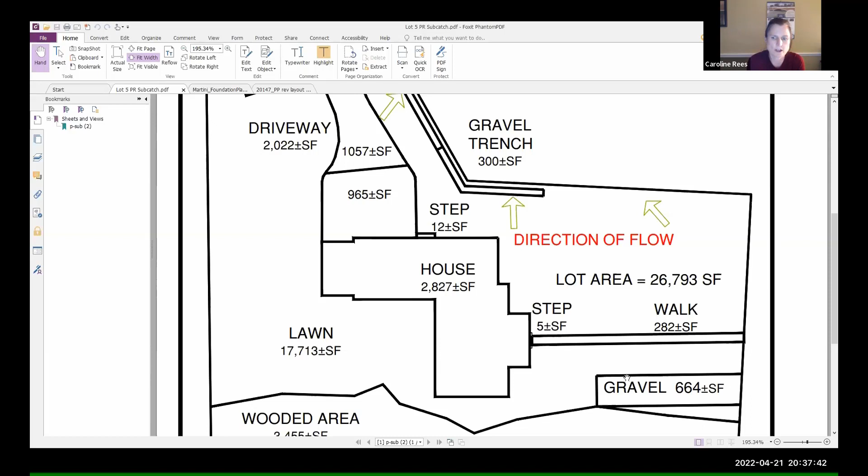But in this case, it did not change the results for the infiltration system, mostly because it's a very small area. In other cases, it certainly could. So I think it was a good exercise, and I'll do that going forward. And stop me if you have questions.

Sure. Well, here we have, I'm having trouble reading, a slab on grade and that's at about 68.5 over by the garage. Here, there's going to be a crawl space. I think he said 4-foot depth, or he has 8-foot footings. And the first floor is about 71. So then there'll be crawl space below, probably down to the finished grade there of about 68, maybe slightly above as well.

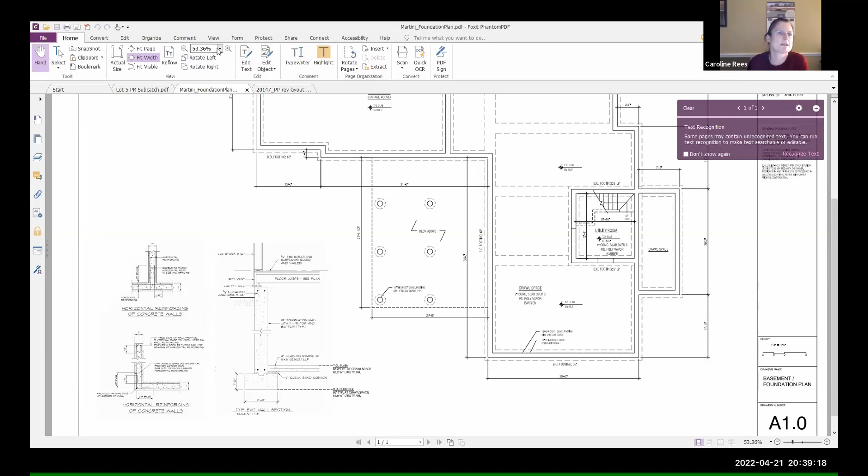And the rest of this is all crawl space, I'm sorry, except for a small utility room near the front entrance. And that, I believe, is about a 6-7 foot ceiling. Let me just see, sorry, bear with me. So the ground elevation there would be 63.2, first floor at about 71, so about 7.5. But that's the area of a finished basement. What's the current elevation in these spots?

The current elevation, let me go back, is about the 69 that runs along the south side or cuts in towards the center. It's about 67 currently. There'll be fill, raising it a couple feet there, but the center right about where the utility room is 67. I could probably show it on the revised layout if you prefer. This is 67 here, existing, and this is 66. And we're bringing it up, 68's about here. So we're bringing it up 1 to 2 feet, depending on where you are.

Hello, can you guys hear me? Yeah, we hear you. Oh, I'm sorry. I didn't know if my sound went.

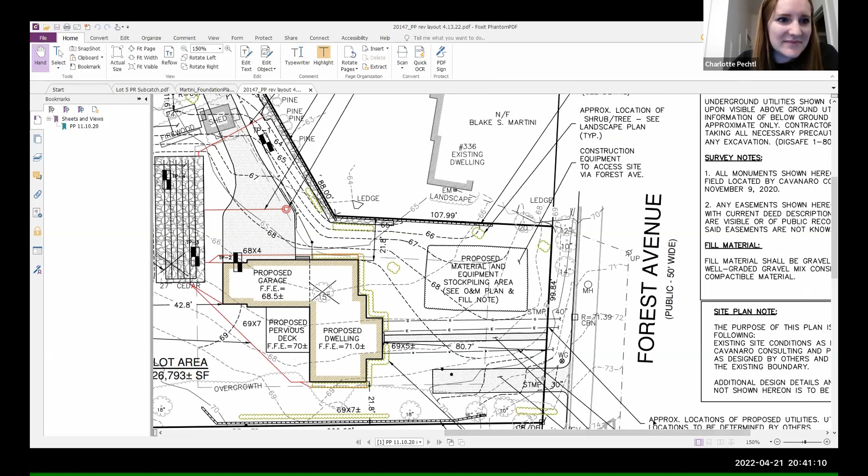Charlotte, do you have any pictures of the test pits by any chance? I do not, but Caroline, do you have any photos? You know what? I don't. I am sorry. Sorry, Tom, go ahead. I did not. John Cavanaro was the evaluator for us. I'm not a licensed evaluator.

And is that your silt sock at the bottom, or is that a retaining wall? Correct. That's a silt sock at the very bottom and then at the top. And so why is there a silt sock up gradient? I think, Charlotte, did we talk about that? Originally, I think I just had one here. It was mostly optional, but the more erosion control, the better, especially if it's abutting certain properties.

I found that sometimes during construction, people have concerns when construction starts. And so when they see that erosion control barrier as the limit of work, it definitely helps. It's not always necessary, but sometimes in given situations with abutting properties, I may suggest extending erosion control around certain areas or along any roads, at least temporarily, to prevent any flooding in streets. So sometimes it kind of depends on the site plan.

Yeah, and you have the IVW. That's an isolated vegetated wetland, right? Correct. Yeah. Okay.

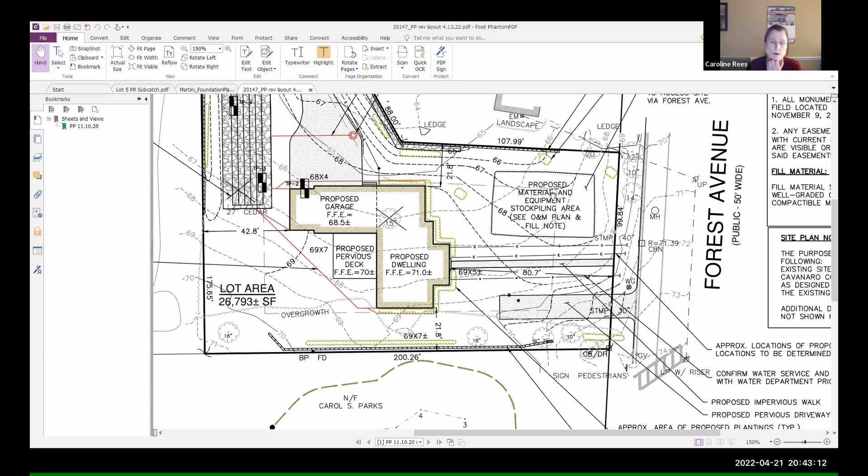Commissioners, any questions, comments? Construction entrance, where's that? And how are you going to build the construction entrance? I have a note on here. I have to find a construction entrance off Forest primarily. I think they'll probably be just driving onto this equipment area as they're adding fill. I think we'll avoid Spindrift, but this is all kind of open lawn. Oh, I'm sorry.

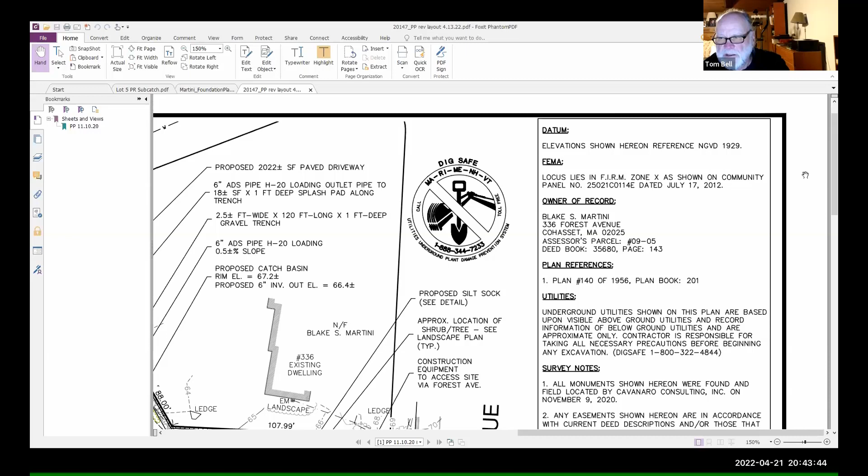So normally we'd like to see a well-defined construction entrance. And what were we usually asking for? 3- or 4- for 60 feet, something like that? I have this note here, construction equipment to access the site via Forest. Well, what we're trying to avoid is all that construction equipment dragging mud out onto Forest Avenue, of course. And that looks like it's fairly close to the road and perhaps not enough room for the equipment to actually get its tire treads free of mud.

And I could shift that over. It's a large area. It's about 70 or 80 feet to the little bump out at the front of the house. So I did leave a very large stockpiling area to give a little leeway, and it is down gradient, but I could tighten that up and push it back. Well, I think we'd probably like to see a defined construction entrance with appropriate size crushed stone so that trucks coming and going are not dragging mud out into Forest Avenue. That's particularly sensitive, that's one of our main arterials here. So it would not be good to have mud tracks going in both directions. Gotcha, that makes sense.

So I think you need to move it over quite a ways. Normally, we're looking for 50 to 60 feet when we can, but it doesn't look like you have that much room here. So the farther to the west you can put that, the better. And again, 4- material, I think, is what we've been calling for. Yeah, usually, if it's shorter, it should maybe be bigger. Steve Ivis always recommended 4 to 6, but 2 to 4 would probably do it as well.

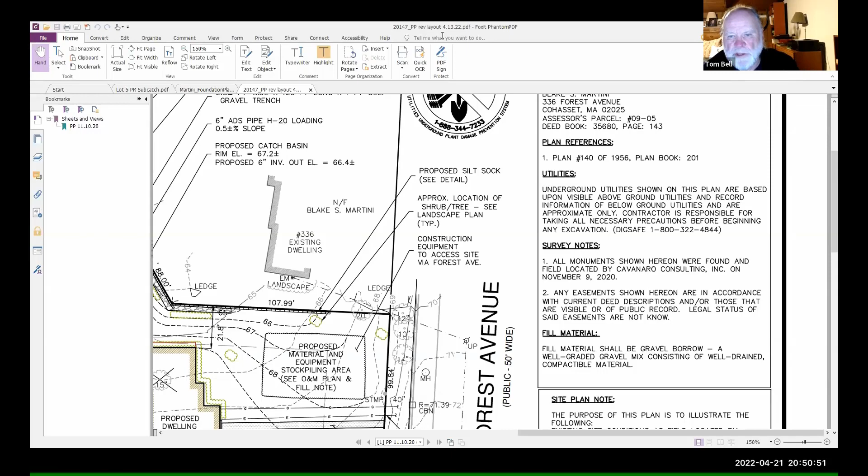Can you scoot the drawing over a little bit so we can look at the Spindrift alternative? Certainly. Yeah, I see what you're doing. Can you zoom out slightly? Certainly. Yeah, they would have to move the shed too, because the shed is already in the place where the proposed driveway is. So it's definitely a little tight over there, but... It's just, Forest is so busy. I think it's going to be a real problem for people. We're gonna hear about it.

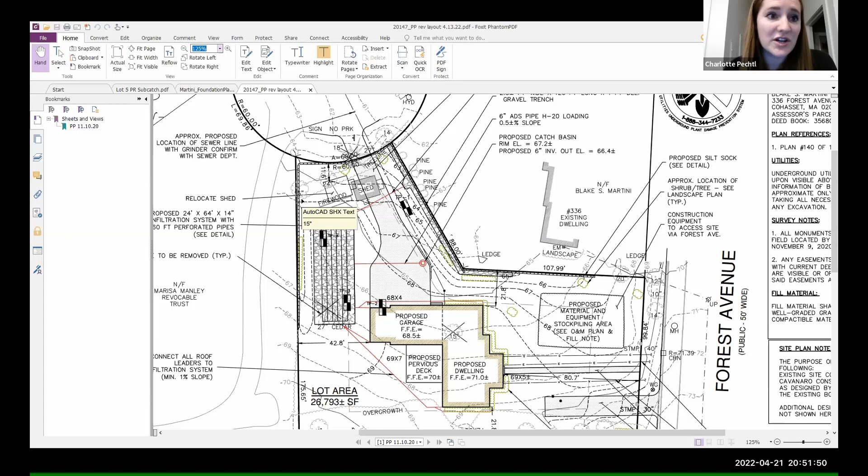We could potentially have both as an option. It would definitely be a messier entrance on both sides, but that is an option. Maybe once the shed is moved, switch construction entrances from Forest to Spindrift. Well, initially, you're going to have cement trucks coming in here to pour that foundation. There's going to be a lot of concrete work for the slab. And so there actually should be a washout area as well for the cement trucks. Okay, so add a washout area? Yeah, otherwise, what are you going to do? Just wash that concrete right onto the lawn? You've got to have some plan for how you're going to capture that.

So trucks coming in from Spindrift, definitely. And commercial or contractor vehicles coming in from Spindrift as well? You're gonna have to utilize the whole property. I'm just wondering if you want them all coming in from Spindrift. No, you're not gonna be able to have that many. Yeah, maybe just the larger stuff in from Spindrift. Large vehicles, large equipment, sure. The entrance to Spindrift is like 40 or 50 feet up from where the proposed new driveway is. So they're either turning in from Forest onto the driveway or turning into Spindrift. So I don't think it really matters, you know what I mean?

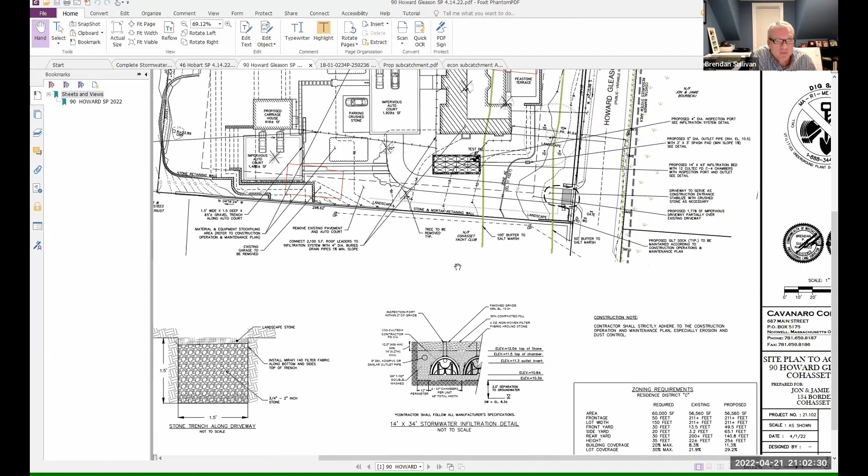Maybe at this point, I could turn it over to Sean and he can go over the landscape aspect of this with you. Before we get into the landscape, can we ask a few questions? Sure. So the red outlines on the drawing are? The red outlines, this is the existing house up here. This is the existing pool in the back. And this is the existing garage down over here.

Brendan, I think it's almost impossible to discern those red lines. I can't figure out where the existing house is. I'm sorry, you've crammed so much onto this drawing. Well, do you have an existing condition drawing? I can pull one up. I don't have it readily available. I can find it though and get it up for you. It gets worse and worse on these diagrams, Chris. Yeah, lots of extraneous stuff here. So, can you see that drawing? Yeah, zoom in, please. Okay.

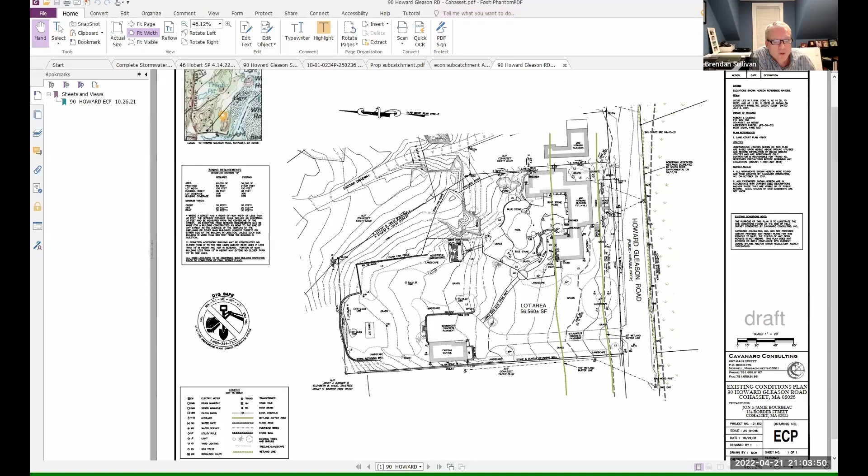So this is the existing conditions plan. It shows the existing dwelling, the neighboring dwelling, which is part of the Cohasset Yacht Club, the pool in the back, bluestone patio, bituminous concrete driveway, basketball court, existing garage, cobble walkway to the existing dwelling. As you can see from this, the primary access in the garage is a ways away from the main dwelling. It's set up kind of odd, where you're actually accessing the dwelling from the driveway, from the rear of the property. So we're trying to change that, to make it more conducive and flow easily.

You're tearing down the existing house, Brendan, correct? I'm sorry? You're tearing down the existing house? Yes. And moving it away from this easterly lot line. Right now, it's about 3.2 feet off the lot line. We're making it conforming on that side, and conforming in the front yard. The front yard right now, it's about 13 feet off the street. So we're moving it back and raising it. Existing first floor is about 16.1. We're raising the first floor to about 16.5 at this point.

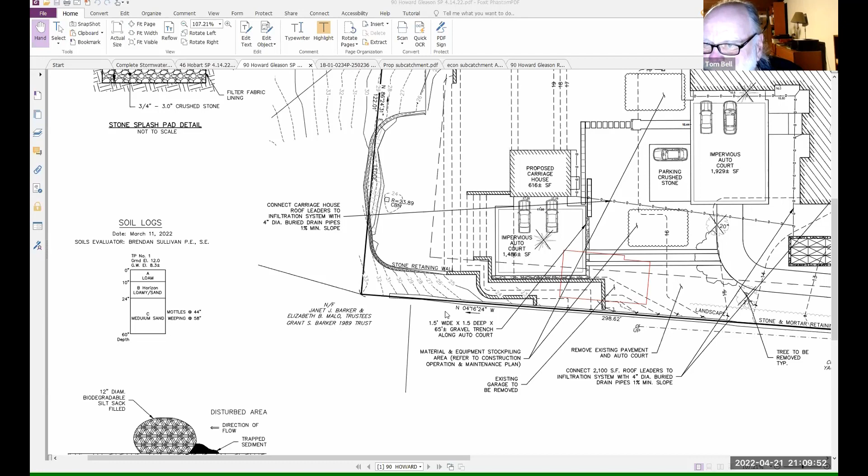Yes, yeah. We modeled the site with C soils, even though there is quite a bit of rock outcrop there as well. But in that area, we found a good depth of material and sand. So it looks like the garage is connected to that infiltration chamber as well, the proposed carriage house. Yes. Okay. And only half of the main house. That is correct. And then you have all these other impervious surfaces here, your auto court and a patio. Yeah.

So it kind of begs the question of where's all that water going to go? Well, it's going to end up as it does today down at Howard Gleason Road into the drainage system down there. As I said, even though it's a coastal site, we're decreasing the peak rates and volumes of runoff in all storm events.

But you're not doing anything about, I know it's reconstruction, but you're not doing anything about total suspended solids here, right? We are for the additional impervious, the impervious auto court up here. Right. Because we do have an increase in pavement area. So we do have a stone trench for treatment for that. Okay.

So, you know, one of the interests that we're supposed to protect is shellfish. And they're sensitive to sediment, and it's going to go right across the street. Even if it's doing it now, it goes right across the street. And of course, the harbor is full of shellfish. So this is not exactly ideal, even though it's happening now.

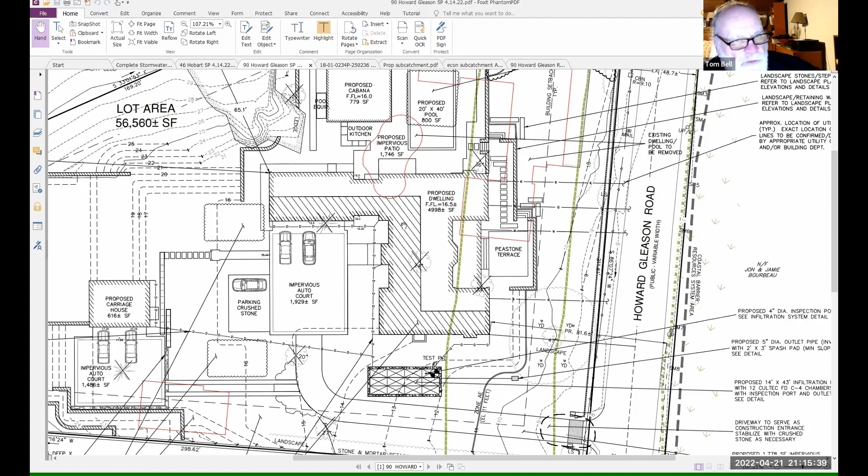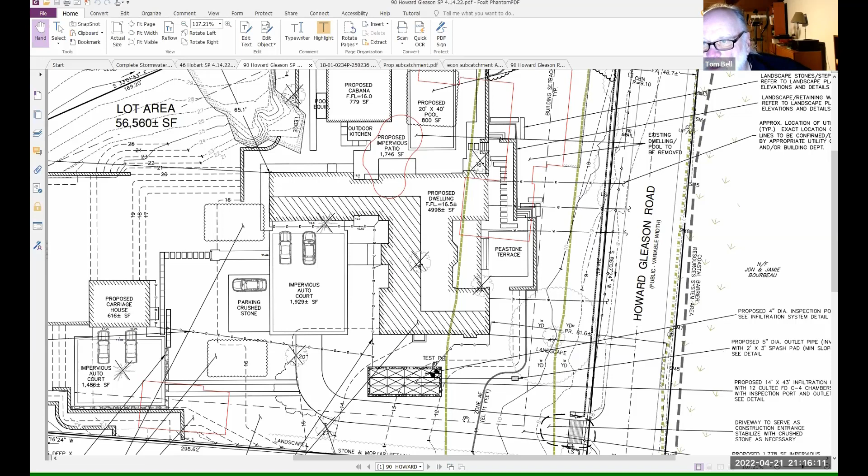Yeah, that elevation, the edge of it is at, yeah, of course, the FEMA flood zone is not terribly accurate in terms of its elevations, but okay, we'll accept 11. Zone AC, is that where you're in? AE. AE, right, okay. Yeah, so those are concerns. You've got a road that floods several times a year and storm drains obviously aren't going to work there. So you definitely don't want to have that infiltration system very close to the road. Oh, I see you've got your AE line there. Great. Yeah, so those are my concerns.

Sean, would you give us a synopsis of the landscape, please? Sure. Charlotte, do you want to share mine or do you want me to take control? Feel free to share. If not, I'm happy to pull it up too. If you'd like to, go right ahead. Okay. Sorry, give me one second. The color rendering, if you want to, would be good, I think. The color rendering one? Okay. I think so. I think it's prettier.

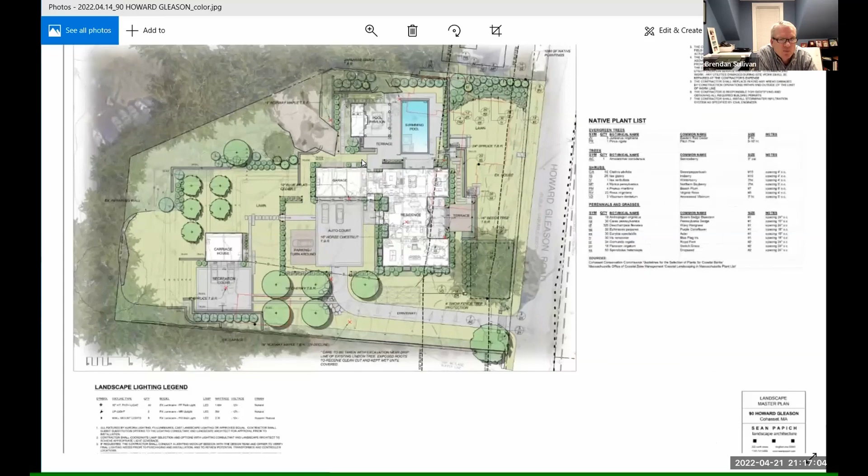Brendan, while she's doing that, how much fill is coming into this site? I think we have almost a net loss of material coming out of there. We're bringing the grade down in the backyard a little bit. And is there a basement? Yes, there's going to be a basement. And will there be a sump pump in the basement? There will be some sort of a sump pump or a drainage system to take care of the groundwater in the basement. And where will that discharge to?

Well, it's funny you asked that because we were in the process of possibly raising the house in elevation because of the basement. So we're either going to get the basement above the groundwater and/or use sump pumps with the discharge. But we certainly will have a discharge point. It won't be out to the street. It'll be either an additional infiltration system or something of the like. Okay, we'd probably like to see that.

We sure would. Sean, Brendan, before you get into the plan, do you have a removals plan? Are you talking about tree removals? Yep. We illustrated them on here with red X's. We noted them if you want to zoom around a little bit. I can hit what those are for you. The big one that we're keeping that's very important is the linden tree down in front. That's the star of the show on the property. But that's what you're keeping. We don't care about that one. Tell me what you're taking out.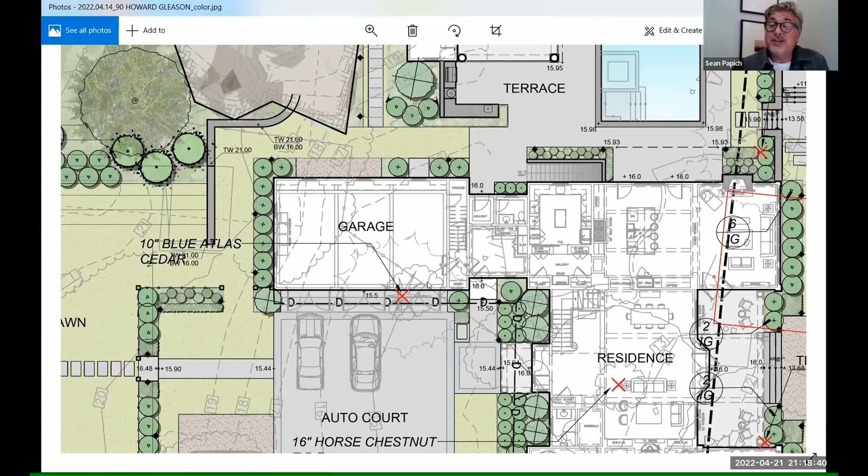Yep, you can see this. In the 50, we don't have anything we're taking out. How about in the 100? 50 to 100, we've got a 16-inch beech tree.

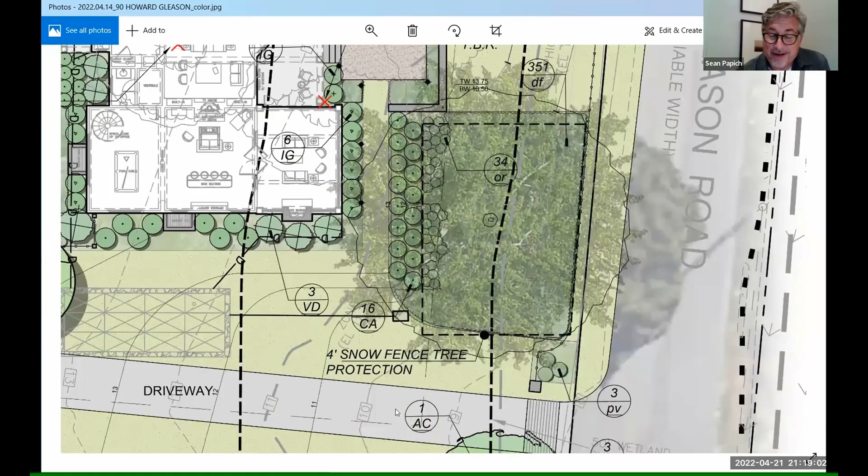Who cares about beech, right? What's that again? Who cares about beech? Right, yeah, exactly. I care about beech. What are you talking about? I'm being facetious.

I know you were, but the 24-inch spruce, which is right at the edge of the house, that's the one that Brendan was talking about, the large one that's tucked in right against the current house into the courtyard. So those are the two main ones.

Stop moving and just show us what you're talking about. Stop moving. We're getting dizzy. I'm not moving. Somebody was. I was. Oh, Charlotte, zoom out so we can see the drawing, please. Yeah, just a little. There you go. That's good enough.

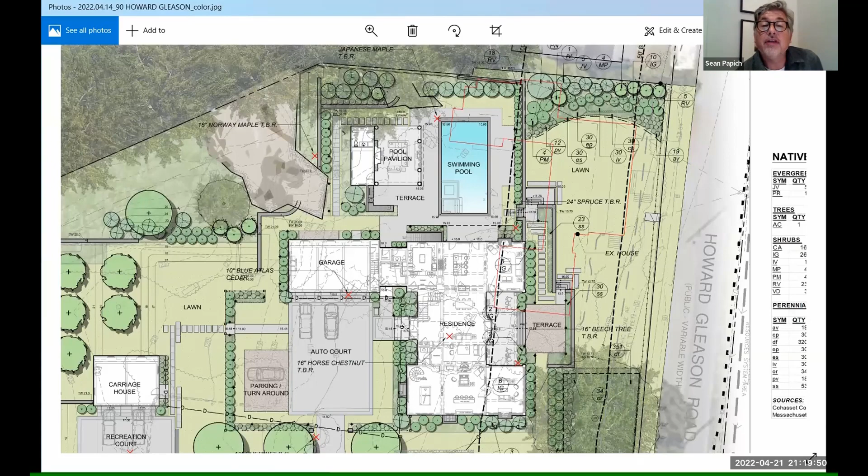Thank you. If you look at the house as you see it now in white, you go to the upper right-hand corner, there's an X there, a red X, and that is the note that says 24-inch spruce in that location. And then below it on the other side, exactly, 16-inch beech tree. So those two are ones to be removed on this plan.

That spruce tree is right up against, I know you don't love that red outline, but that's where the red outline of the existing house is, and that's right on that rear wall. When that comes down, the spruce is coming down with it. The other beech trees start to grow into the linden tree, and that goes away. So in terms of your 0 to 100 foot buffer, those are two trees to remove, the one large linden to stay.

In terms of the planting treatment, the intent is to still have a fair amount of planting on that side, far side of the upper side, which is actually east. Upper side of the page is east. You can see we're at the 50-foot buffer line, that hatch or that dash line, and then the 100-foot. Loading up there with all of our native species, pitch pine, cedar, bayberry, the usual suspects, Rosa virginiana.

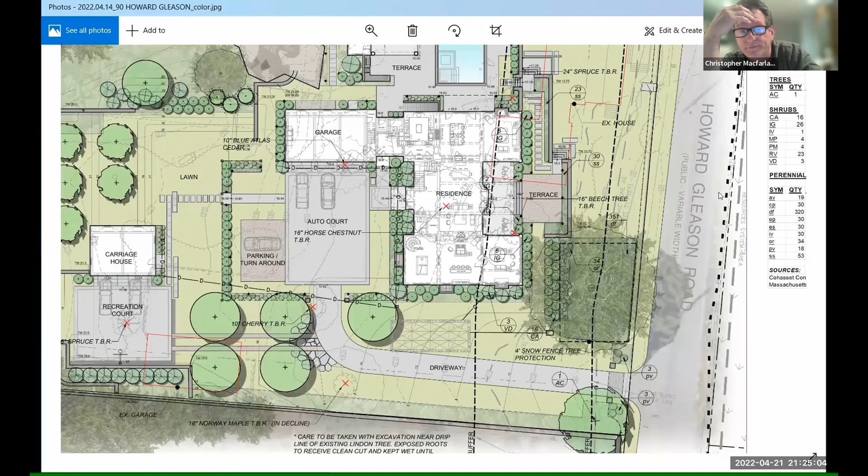Is it? I can't see it. You want to zoom in? No. Tell me what your AC is. Amelanchier here. That's going to be a serviceberry tree. The 50 comes across right in that location. Mm-hmm. Charlotte, do you have any photographs? I do, yes. I can pull those up.

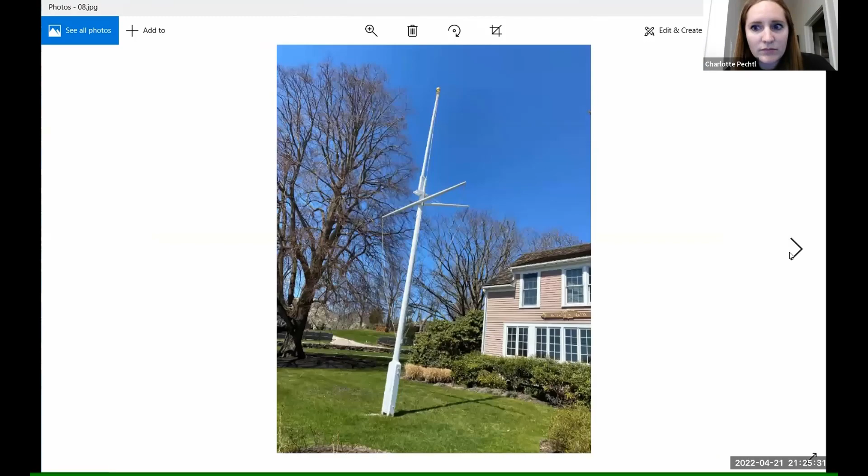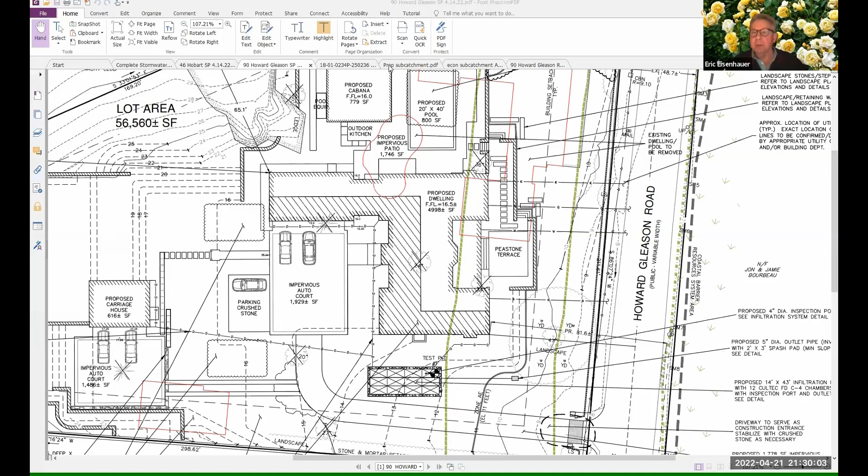Another one bites the dust. Okay. Chris, I'm going to take a short break. I'll be back in 2 minutes. Okay, maybe we'll just hold off a second then. We can all peer at the plan.

Who's presenting? Tom, are you presenting? Oh, Brendan Sullivan again. Brendan, is that full screen? I believe it is. I can zoom in a little bit. I'm dying here with the full screen. Maybe it's my fault. Okay.

So I got one sheet on, I do have the existing conditions, and then on top I have the proposed conditions. So hopefully it's a little clearer, but the other site was just too big of a site to put on one sheet. So maybe moving forward, we start making an existing condition sheet and a proposed condition sheet. Maybe even some additional sheets if need be to help clarify and help you guys understand what's going on in these sites, because I know they do get awful busy.

For me, I've been doing the same thing for 30 years. So I know what all the lines mean, but I draw them. So it's easy for me, but it's not easy when, believe me, I've been on the other side of the board as well. And reading different plans from different engineers and different surveyors, it can be a tough go at it. I understand that. Okay, why don't you go ahead then?

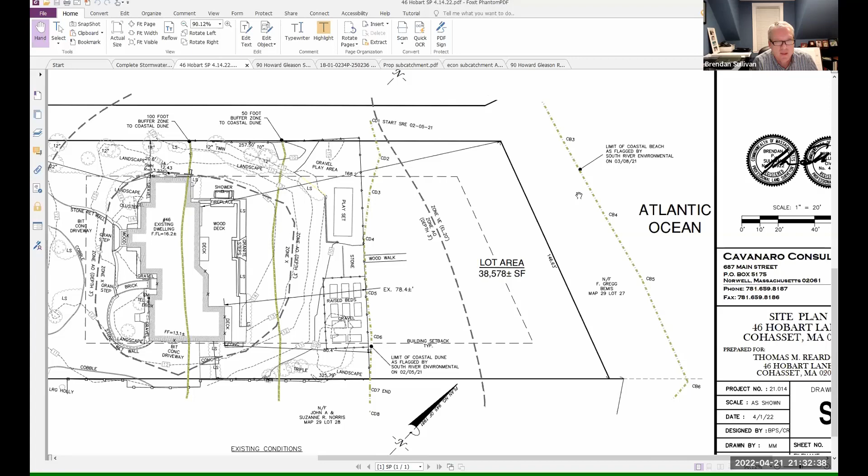And the rear yard is basically, as I said, the wood deck. There's some granite landscape elements there. We have lawn. We have a play set over a gravel area, which the play set has since been removed since we did the plan. There's also some raised gardening beds down here as well, right up against the coastal dune. We also have a flood zone, which is an AO depth of 3 feet, which is delineated on the floodplain maps.

I don't know if you're familiar with the AO zones, but they are delineated graphically. There's no elevation associated with them. It's just a depth of 3 feet. So what basically happens is actually seaward over here, we do have a VE, a velocity zone of elevation 20, which is out probably about mid dune.

So what happens is the waves come, theoretically crash over the dune, and then the water rushes over this part of the land, and then it rushes over towards Hobart Lane, and then eventually goes down the southerly part of Hobart Lane, I believe, and somehow makes its way back to the ocean, or I think some of the runoff actually goes down and ends up down towards Lothrop Lane and goes out to the ocean through Sandy Cove. Believe it or not, I think that's how some of that goes.

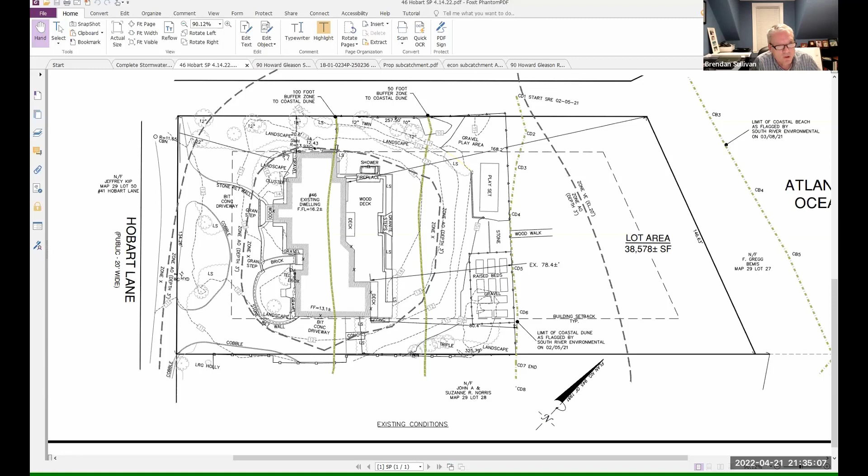So the flood zone, it's very odd in this area because they have a circle around this house, and they also have a circle around the Norris's house, which is just to the south of this. They have a circle around their house and their pool cabana, which basically takes these structures out of the floodplain. Hopefully you'll be able to follow all that.

So what we're proposing is to get rid of the circular driveway, get rid of the driveway to the south portion of the property. We have an auto court proposed up in this area, proposed house, garage. So just one driveway entrance now, eliminating the secondary entrance. Proposed driveway, auto court turnaround area, vastly reducing the amount of pavement that was there previously.

So right now there's almost 4,000 square feet of pavement. We're proposing just over about 2,200. So almost half of the impervious area for the pavement alone. The whole site overall net impervious, it's only an increase of about 100 square feet of impervious.

So move to the backyard. We're proposing an impervious patio. We got a screen porch. We have a pervious deck, and we also have a small in-ground pool, 12 by 30 pool, which does go into the 50-foot buffer. There's also a couple smaller retaining walls that go into the 50-foot buffer to retain some of the terrace work in the backyard.

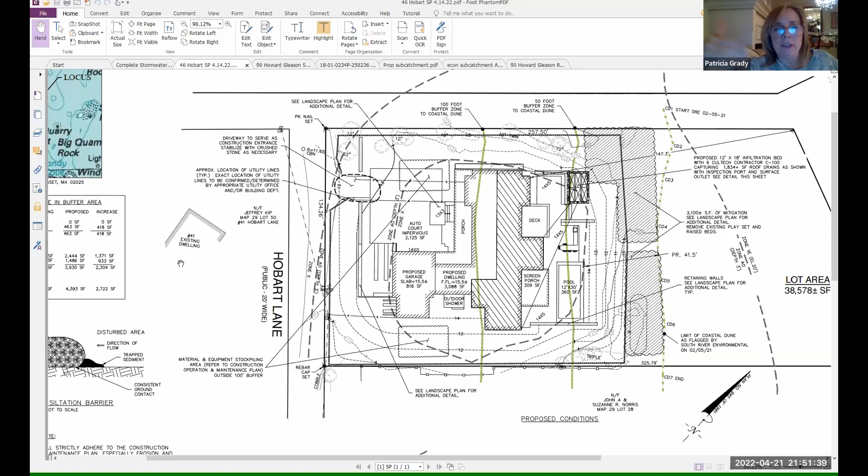I think the question and answer were convoluted, because I think I understood it though. I didn't. You asked if there was an increase in the whole net. They did decrease it on the driveway, but overall in the project plan there's an increase in the impervious. Is that correct? Yes. Brendan, I think we put the numbers on the side a little bit over to the left. That's the square foot impervious coverage within the 0 to 50 and 50 to 100 foot buffer in the back. The total impervious areas are in the stormwater report. But as you can see, we're increasing the 0 to 50 just over 400 square feet, and between the 50 and the 100 about 2,300 square feet.

So what is the initial 45 square feet in the 50-foot buffer? That's some of the bordering, there's a few stones over here and this timber border around the place. That's really about it. That timber border is 45 square feet? Well, yeah, it runs along over here, and I don't know if there's stepping stones or something down in this area here. There's some stones in that area. You can see where it's a stone. Yeah.

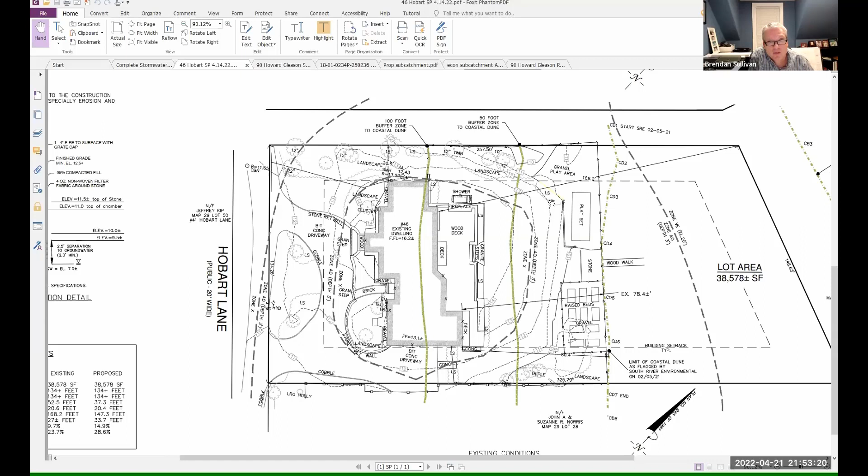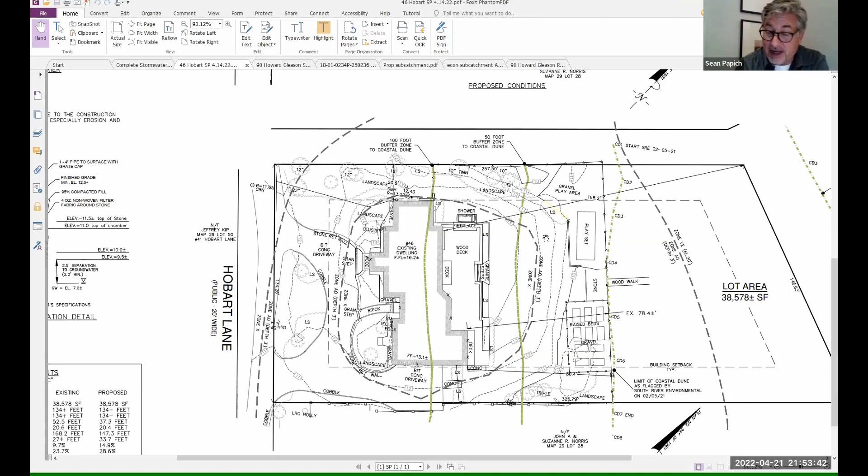So basically all that area is gravel, it looks like, except for the raised beds, which would be soil. Correct. And underlying it is gravel, is that right? Yes, most likely. Okay, so it's fairly pervious then, right? Could be. Probably. But we don't know the makeup of it 100%. Could be ledge. Don't think it is there, but it's not vegetated. And if it could be done with some sandy loam and beach grass, perhaps, I think there would be an improvement there.

I do know if you take a hard line of only saying, don't touch anything inside the 50, don't ever put a structure inside the 50, don't consider any specific site, just have a simple rule of assume nothing exists, stay out of the 50, then obviously we haven't done that, because we're proposing about 400 and some square feet in total into the 50. But if you look at the disturbance of the site all the way to the edge of the dune now, and consider the other improvements being made from a planting standpoint, I think considering everything in total would make sense.

The other thing that could be possible is that the terrace behind the house, considered a stone terrace, could be permeable. It could be a permeable stone setting if we did that. And that itself, to me, would offset the fact there's a physical distance between the proposed edge of the swimming pool and edge of the dune of less than 50 feet.

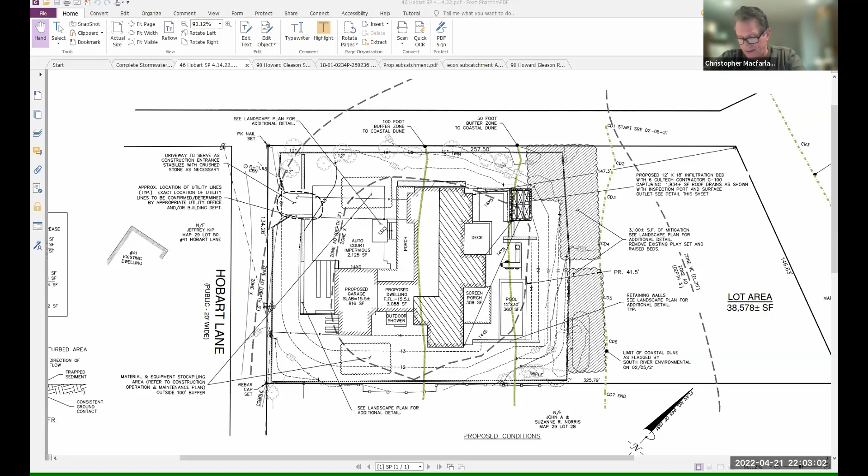And we've done this, and we've been fairly thorough because of our belief. We didn't want to expand in that area. So this isn't the first project. It isn't the first time, certainly, that we've run into this issue. So may we continue this until May 5th? Oh, Cinco. Yep. Sure. Okay, great. Thank you very much. Thank you. Appreciate it. Thanks a lot.

Okay. Yeah. Did we lose someone? Okay, there we go. I haven't fallen asleep yet. Well, that's nice. Only because we were talking about your old house, huh? I think you're right. It's my raised beds. I got a letter from Paul Shea letting me put them in place. I think I'm going to frame it.

Okay. We do have a couple matters of business. We have some people still in the audience as well, just so everyone knows. Our next order of business is approval of minutes from the April 7th meeting. Has anyone had a chance to review? Does anyone have any comments? I have no changes of merit. No, looks good. Okay, then I'll make a motion to approve the minutes from April 7th, 2022. Do I have a second? Second. Having a motion and a second to approve minutes from April 7th.